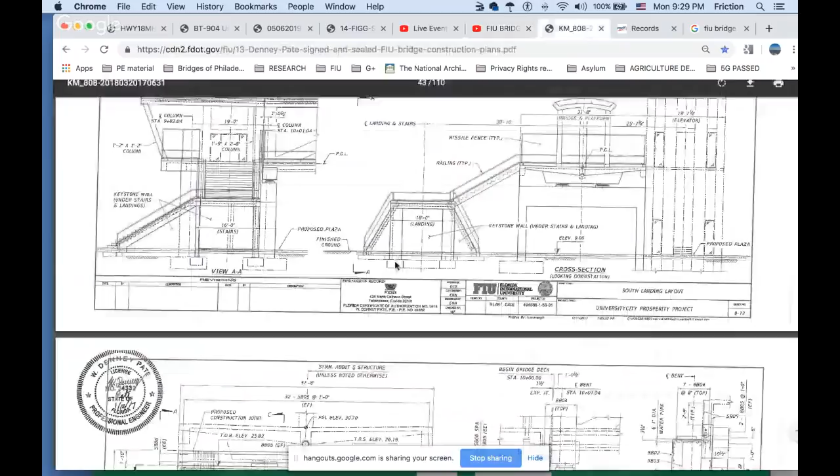Let's jump into this. So right now we have a release from, these are only tabs I'm going to work with right now. I released them from 44 pages. Well, it shows up as 44 pages on my format on this situation and on this structure. You know, grout was my number one thing. It's only got 2 points of grout in here. Let's see if I can get this to work properly. It should. Okay. So when I look up grout, it says by using find.

MCM showed concerns of the timeline between using grout versus gray concrete as per workability. And once again, FIGG prefers the grout material, but if it helps expedite the process. Otherwise, FIGG will be okay. Now, let's just vindicate myself first real quickly. Look at this. CEI to FIGG. Do we need temporary shoring? FIGG, this is the question.

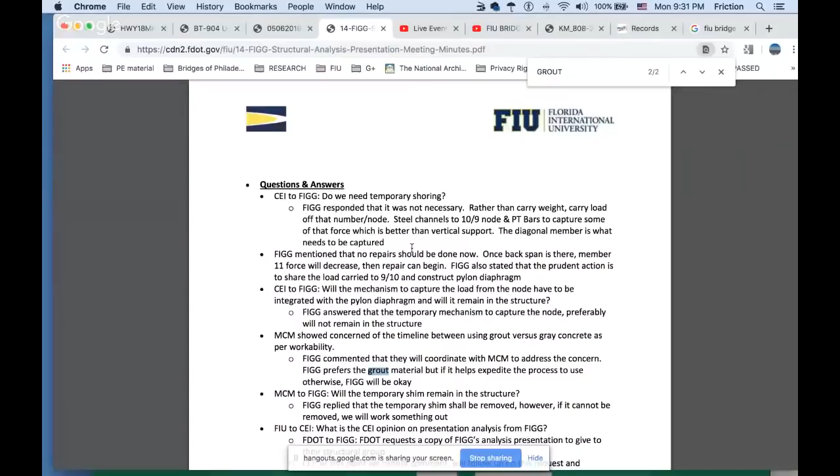Now, let me just see if that's in here real quickly. I have not read this document fully, only a few things, and wanted to get it going with you guys immediately. All right, so it's not said. So you know what I say to that? I say they're still patting each other on the back. Because if you want to throw somebody under the bus, that would also throw them under the bus, because if they said that and they didn't do anything about it, it would look bad on them. So I guess they're protecting themselves by not putting that exact statement forward. But it's still the same end result.

But I can't stand white lies. I just like the truth. All right. FIGG responded that it was not necessary. Rather than carry load off that node, steel channels to 10/9 node.

Guys, you know I can't wait to see some people come in here. I've been getting harassed by everybody telling me 11, 11, 11. Yeah, they talk about 11, but you know me, I kept preaching that these loads are going down 10. They're not going down 11 anymore. 11 is separating. It's not load bearing. It's a reversal, if it ever had intentions to carry weight. But here we are. The meeting was talking about 10/9. How awesome is that? I've been waiting for some vindication. So far, getting it from FDOT.

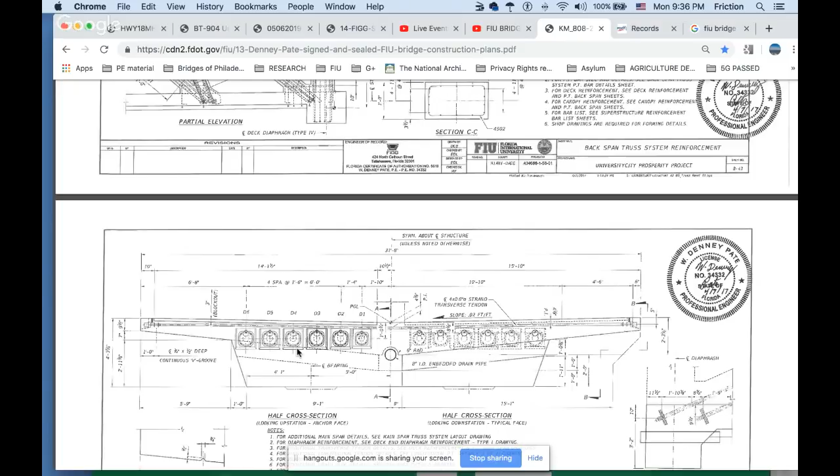So let me come here for you. The base, where they come across all of them. And so this will now end my thoughts of it's no longer ambiguous for me by reason or deduction, extrapolation. We have 6 post-tension bars here, cables here, and 6 over here. They appear to all be filled in working order. They appear to be all capped, that they're all installed.

So if he's still saying that the backspan needs to be connected, remember I wasn't sure. I've always had a theory that this entire structure over here could be supported by the post-tensioning of the cables here, longitudinal cables. But their video, if you remember, was saying, look, they don't have the canopy tied in fully yet. That would have taken some of the load off of the deck here, because the canopy would have been supporting it. And that's what I've said about the design, if you guys remember, in a couple of my videos.

That's what they're talking about here when they state, once the backspan is that 100-foot, what they call the other span, the backspan. All right, so the other connection. Once the backspan is there, member 11 force will decrease, then repair can begin. Okay, so they're thinking member 11 force will decrease, the tension in it. Not going to mention compression yet. But that would tie the roof canopies together.

So let's do this. Let me give you an explanation of that. Sorry, I'm going to scroll to the top on you guys, so you're going to have to bear with me. It's going to be a few pages. And where's the mouse? Okay. So you can see what they're referring to, because I don't want to lose anybody who's new to this whole thing.

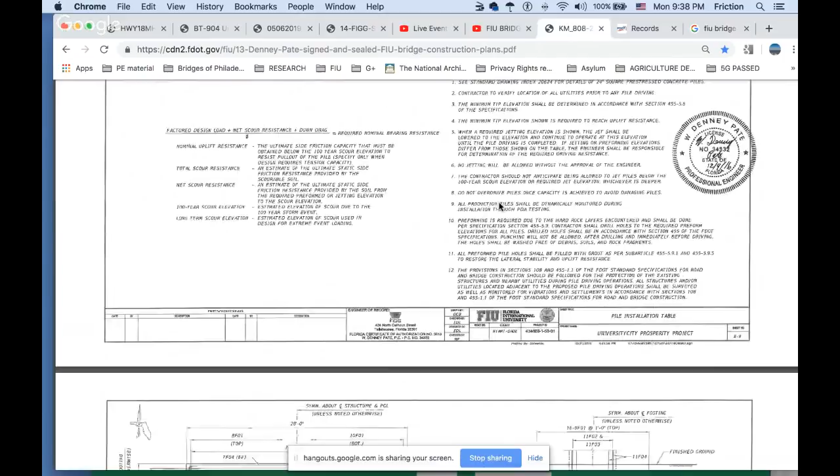That would make this a long, more rigid, complex situation, along with this pylon going in. It would tie it all in, lock it all in, and that would act as one. So a lot of people hate on this structure. Of course, it's been a year and a half. I did a slenderness factor, just hating. I'm biased. I don't like post-tensioning. I love what it can do. I just don't like it because it just seems destined to fail.

And I wanted to load a video up for you guys, it's from another guy, but now I lost the video somewhere on all my hard drives, external drives. I was trying to find it tonight before this video to talk about what would fail first.

If I were to think of your lug nuts on your car, and you can put this anywhere you like, but if I were to tighten up lug nuts, let's call them 5 lug nuts. Let's say I torqued them all at 69 pounds or 70 pounds, make it easy for you guys. They're all exactly torqued at 70 pounds. But the clamp force is different. You guys are like, wait a minute, what's this mean, clamp force?

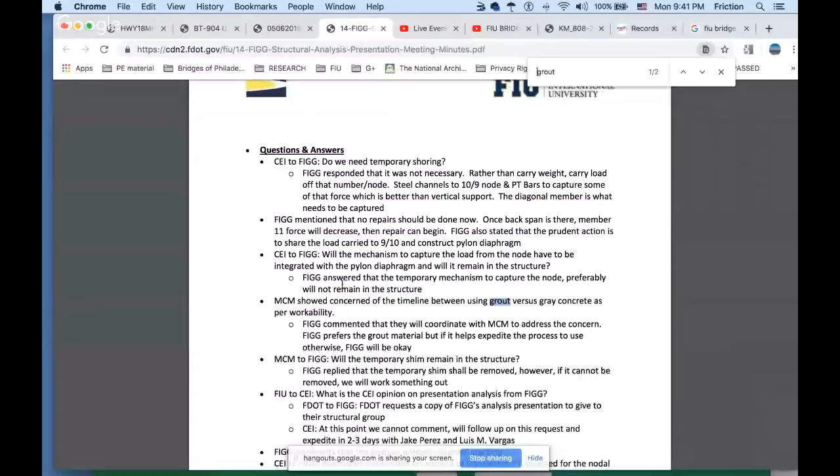You need more ways to determine strain on this stuff, elongation. And so they have a factor that's... let me move on from there. The factor can bite you in the ass. Obviously, it did in this structure. MCM show concern. Okay, where am I going here? Once the backspan, this is FIGG speaking, 11 force will decrease, then repair can begin. FIGG also stated that the prudent action is to share the load carried to 9 and 10 and construct a pylon diaphragm.

Guys, you know how much I've been crying about this 9 and 10. I am so vindicated now. This is FIGG saying this, so he realized it was going down 9 and 10, which I've always screamed to you guys. There is no force in 11. 11 is not the issue. It's 9 and 10. It's 10. You guys know how much I cried that. So now I wonder if anybody's going to eat their words now, all these other groups that attack me.

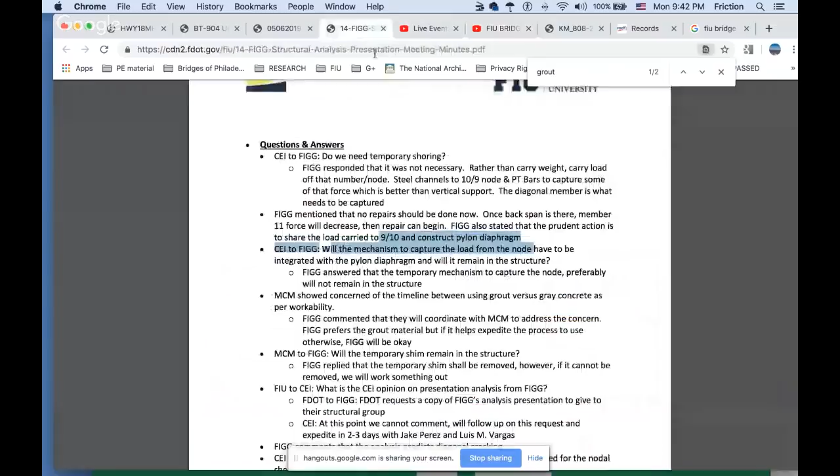Hey, Embry. You said there was an invisible bird. Thank you. Hey, I got to give myself a thumbs up so I can pat myself on the back. All right, look. So all the other groups attack me for not saying 11 is non-load bearing. Eat me. Embry must like that. Embry's my man. He's aggressive like that. So I'm laughing my arse off right now with this one. I'm smiling, actually.

All right, the CEI represents FIU. The CEI to FIGG question is here. Will the mechanism to capture the load from the node, and we're talking node 9 and 10, has to be integrated into the pylon diaphragm, and will it remain in the structure? So they were talking about a steel, some type of brace, and that brace would carry the load from here to, of all things, the pylon, right? This is where I said the weakness, the issues are happening.

So they 100%... Denney Pate obviously saw it, he had photographs. And it took me some time to see this. If I'd had the photographs, I'd like to say I would be fast too to come up with the answer. But it took me a while with the limited data I had to come to this. What, 4 months before I finally said it's going down 10, and nothing down here. Maybe 4 months. I finally committed to that with the data I was able to capture. Well, maybe I committed earlier. What do I know? Maybe it was 4 weeks.

CEI to FIGG. Right. FIGG answered that the temporary mechanism to capture the node preferably will not remain in the structure. So this 9 and 10 node, to capture it and redistribute it to the pier, the pylon. The pylon. So we come here, the pylon here. They're going to talk about shims. I did get that far before I jumped in here with you guys.

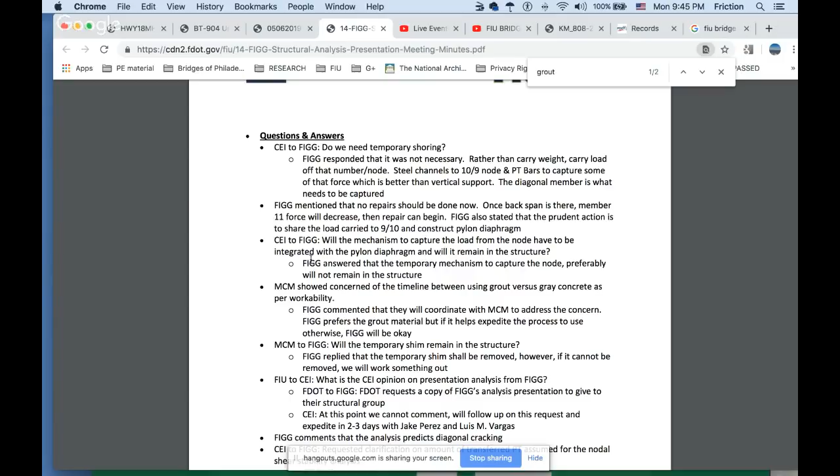CEI to FIGG. Well, the Met, right. FIGG answered the temp, right. MCM jumped in on this part, well, at least the way they put this forward. MCM showed concern of the timeline between using grout versus gray concrete as per workability. Now let's think about this. We talk about slander and stuff like that. This is FDOT putting this forward. FDOT putting this forward during a court case clearly is willing to stand by this statement.

So we're probably looking at a real document, and FDOT with this document is clearly saying to NTSB, hasta la vista, baby. We're now covering our tracks. We're gonna start covering our ass. So this document here, clearly without NTSB's permission, would be a violation of their agreement. So now we're gonna start seeing things come out, I believe, the fight backs, but we will not see it come back from MCM. We will not see it come back from FIG, because you got to remember, any public statement they make could be a court action against them. So we won't see them speak up. If we do, that would just be ludicrous on their part.

MCM showed a concern that the timeline between using grout versus gray concrete as per workability. Okay, do you see this? This is a jump, and I don't want to fall into post hoc stuff. I'm really about that post hoc stuff. Just because of one doesn't mean the other's tied together. So I feel like I'm being set up here. This is too much of a hand-me for me. I kept saying the things aren't grouted. There's no grout. I don't like this. The way they're handing this to me right now, I don't know where this grout is specifically going. Is it in the tubes? Is it part of the shimming of the structure?

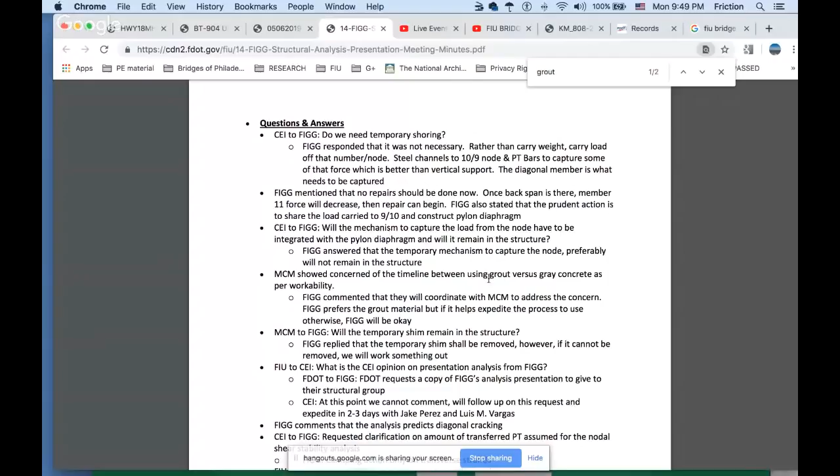MCM showed concern of the timeline between using grout versus gray concrete as per workability. Okay, so this grout is mentioned, but it's down here. I think they address it more. Let's go back up here. Attendees: FIGG, MCM, FDOT, FIU, 2 representatives, BPA, CEI, Joseph Morales.

Okay, FIGG's presentation summary. FIGG pointed out the cracks look more significant in person than on photographs. You guys remember I said this? But remember, I only had access to that for a very short window. And I said I lost my damn notes on it. I said somebody kept saying it looked worse. And isn't that amazing? It was Denney Pate that was saying it looks worse. It's more significant in person than on photographs. It was Denney Pate saying that all the time. Or FIGG, if you will.

Whereas I think I might have told you guys, so I need a correction, that it was somebody photographing in the field, giving it to the meeting live minutes. Well, remember, I was looking at notes from, yeah, I think I might have said that already. So I'll jump down that hole. From an OSHA report. So the OSHA report made this statement here. Temporary construction loading condition. Bridge was loaded onto the permanent support on 3-10. This is just documents, matter of statement, I don't want to say fact.

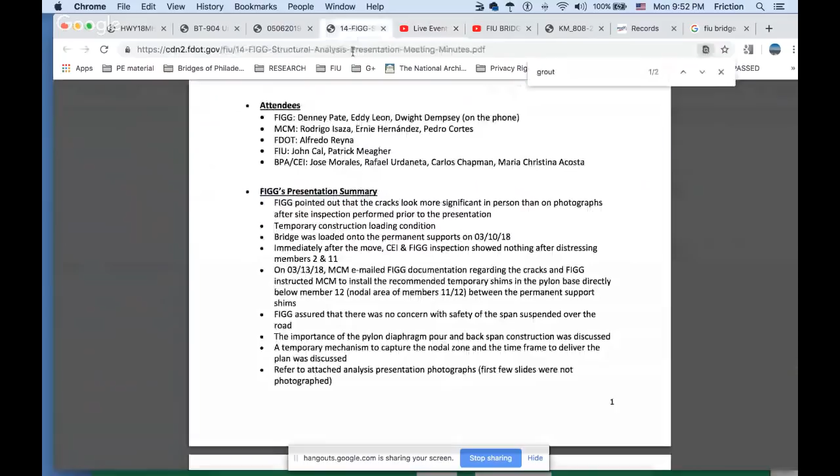FIG assured that there was no concern with safety of the span suspended over the road. Okay, we already heard that one. The importance of the pylon diaphragm, pour, and back span construction was discussed. Okay, a temporary mechanism to capture the nodal zone and the time frame to deliver the plan was discussed. So this was talking about the repair. Nodal zone would be that 9 and 10, 10 and 9. However, they wrote it twice, 2 different directions, I think. Refer to attached analysis presentation photographs. First few slides were not photographed. Whatever that means. Okay. And here it is.

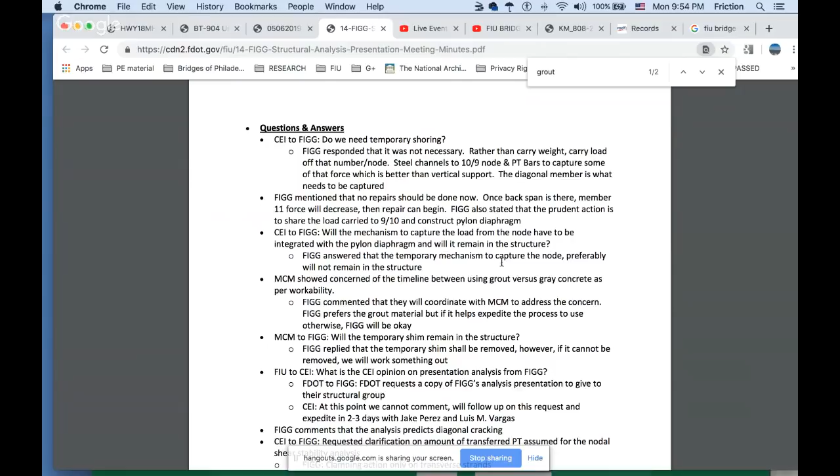the railing to the steel member for whatever reason, representing to the steel people of America, because you realize you're using concrete, you want to give an homage to steel. That's the way you play that off. All right. FIGG answered that the temporary mechanism to capture the whole node preferably will not remain in the structure. And I guess there goes my railing thing about the homage.

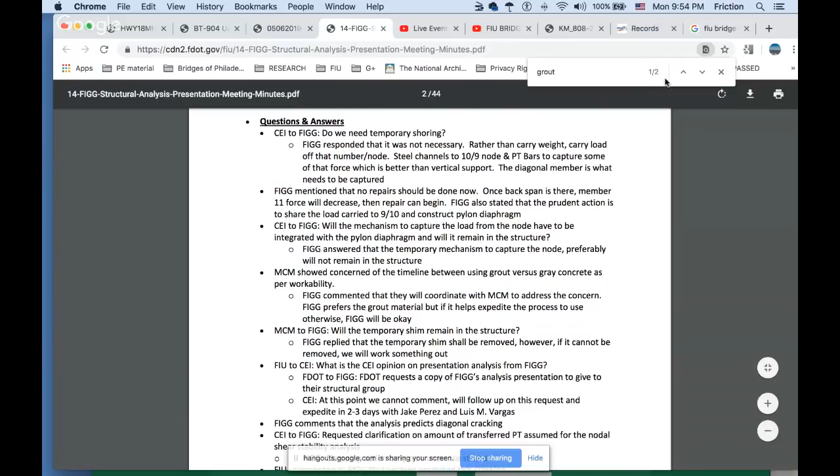MCM to FIGG: will the temporary shims remain in the structure? Now, the shimming they're talking about under 12, and oh, hold on. It's dealing with the cracks. Okay, I think I know what's going on. Let me back it up. I think I know what I'm looking at now. Where's that 12? On the 12 again.

You guys can probably see it. I'm bouncing around. That 12, 11, 12. The shims in the pylon base directly below member 12. Between the permanent support shims. I think that's some weird wording, but I think that the intent might really be that this is the pier.

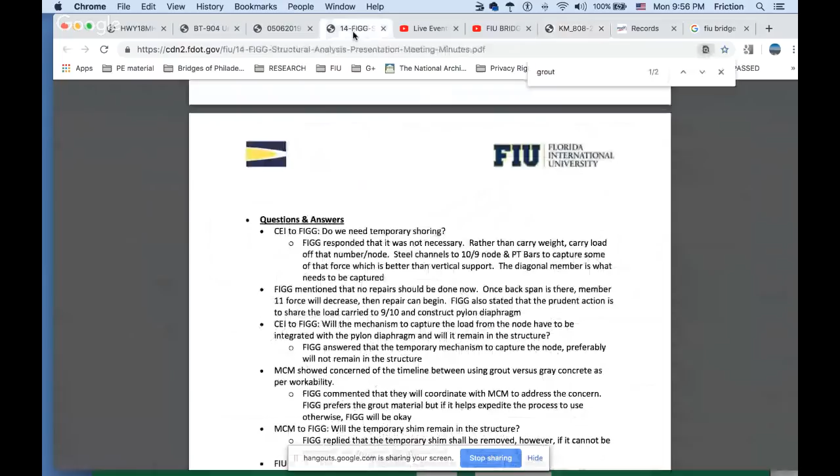Oh, okay. So I need another image. So the pier might actually be right on the edge of it. I was thinking right here, the bracing that they're trying to sneak in there. Let's keep rolling with this real quickly. All right. This is MCM to FIGG. Will the temporary shims remain in the structure? MCM's asking, structurally, will they remain in the structure? It's a good question. FIGG replied that the temporary shims shall be removed. However, if it cannot be removed, we will work something out, make it decorative.

All right. FIU to CEI. So FIU in the same meeting is addressing their own expert, if you will, and they asked, what is the CEI opinion on presentation analysis from FIGG? FDOT to FIGG. Oh, I'm sorry. They don't answer it. FDOT requests a copy of FIGG's analysis presentation to give their structural group. They want FIGG's analysis so they can present it to their structural group to look at it. CEI: at this point, we cannot comment. We'll follow up on the request and expedite in 2 to 3 days with Jake Perez and Luis M. Vargas.

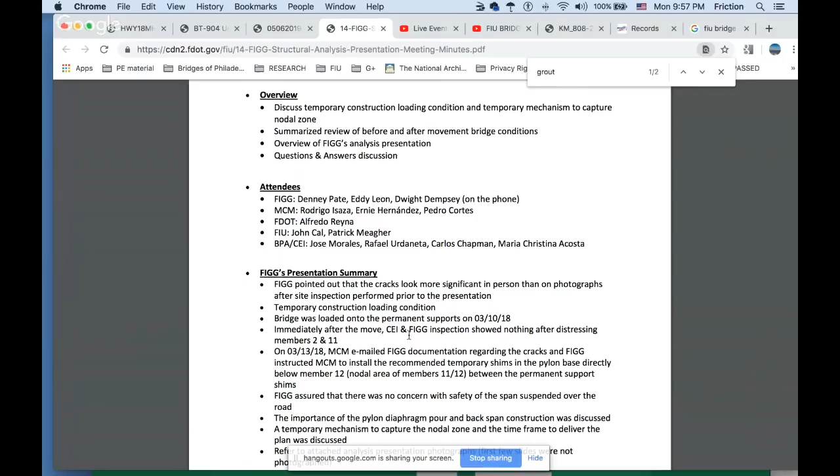So I forget who they are. They could be the CEI engineers, other engineers, or it could be anybody. It doesn't really matter. They punt it. They just punted. FIGG comments that analysis predicts diagonal cracking. So we know it's diagonal cracking. We see the diagonal cracking going up the member.

CEI to FIGG. Now, CEI, that's FIU's representative, remember? Request clarification on amount of transfer post-tension assumed for the nodal shear stability analysis. They want the data. FIGG: clamping action only on transverse strands.

So they're leaving out, they have a lot more details. Maybe it's in the photograph down here, but maybe the transverse comes across, right? Longitudinal, these guys; transverse are the ones that come across this deck. So maybe when they go to put this brace on, he's saying that the stress is going to be on those. I'm extrapolating at this point.

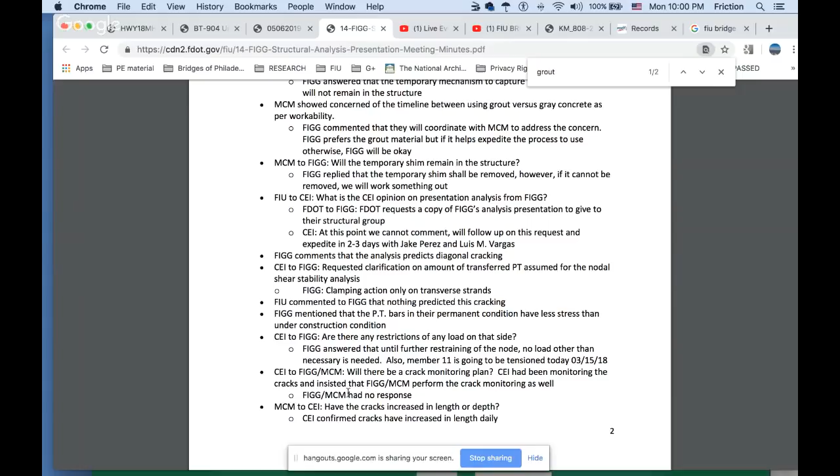CEI to FIGG and MCM: Will there be a crack monitoring plan? CEI had been monitoring the cracks and insisted that FIGG/MCM perform the crack monitoring as well. FIGG/MCM had no response. MCM to CEI: Have the cracks increased in length or depth? CEI confirmed cracks have increased in length daily.

FDOT to FIG: Are you going to continue to figure out why it happened? FIG responded that all we, quote, know is that it just happened, end quote. All right. Awesome. So leaving out a lot of the rest of the statement, it's "it just happened." That's a weird piece of quote they snatched out of there, isn't it? That's unfair to FIG for sure.

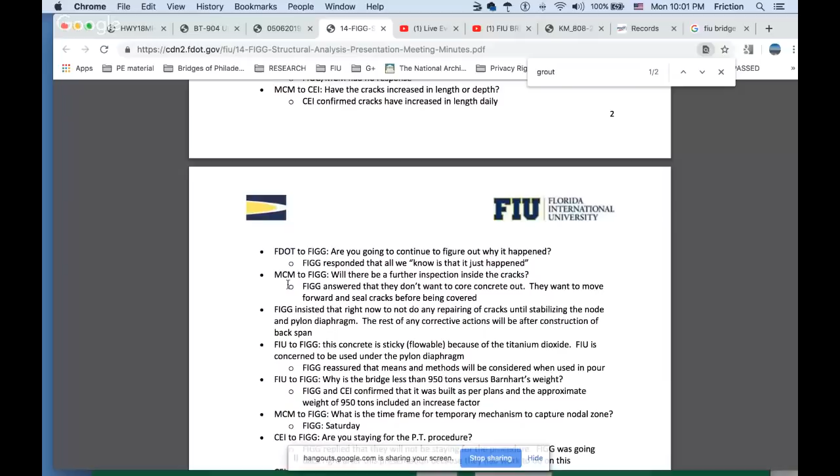MCM to FIG: Will there be further inspection inside the cracks? I like this. So MCM, the builders, asking FIG, the engineer, will there be further inspection inside the cracks? FIG answers that they don't want to core concrete out. They want to move forward and seal cracks before being covered. Whoa, he says you have a plan. And they want to seal cracks before being covered.

What the hell? FIG insisted that right now to not do any repairing of cracks until stabilizing the node and pylon diaphragm. The rest of the corrective actions will be after construction of backspan. So yeah, he punted. He thinks the backspan is gonna give it reinforcement at this point with the longitudinal cables across the canopy, along with everything being tied in there, number 12 being tied in. That's what I extrapolate.

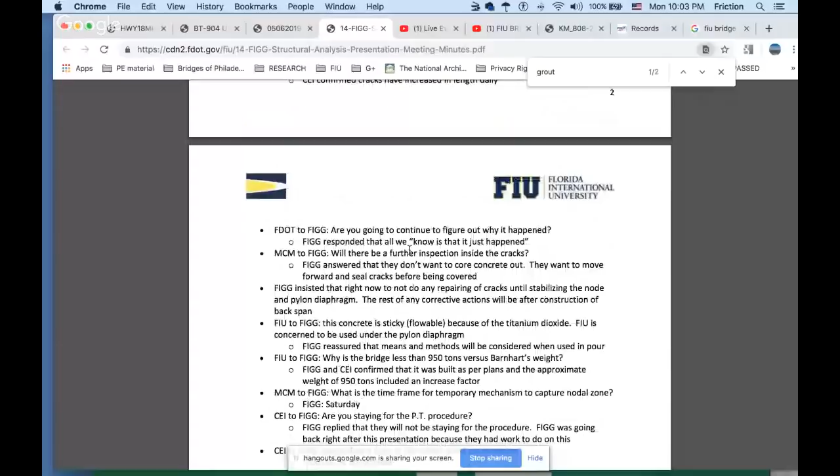FIU to FIG: This concrete is sticky, flowable because of the titanium dioxide. FIU stepped in now, not the CEI, but FIU. FIU is concerned to be used under the pylon diaphragm. Okay. It's sticky, flowable. That's kind of opposite, isn't it? How is it sticky, same as flowable? That one's got me weird. Let's look at FIU now because I can research these people. FIU's people is John Cal and Patrick Meagher. Sticky. Where are we going?

All right. Under the pylon. So that doesn't have anything to do with anything. I would want to know, is it this PSI? The bridge is 4,500 PSI. What's the PSI of your grout? This has to be 4,500 also. You don't change your grout. You don't make your grout tougher, and you sure enough don't make it lighter. So it's 4,500. That's where that stays.

So I don't know about all this weird talk going on from engineers instead of going, hey, we're just keeping it at 4,500, is what they should be saying. The bridge is 4,500. Our grout's got to be 4,500. So I don't get it, per FDOT's requirements. I'm giving that to you guys from FDOT's requirements. Scary. Yep. All right.

So we go back to FIG. This is FIG talk. Reassured that means that methods will be considered when used in pour. Okay, so this is not a placement. This is a serious piece of concrete they're talking about adding. If it's grouting, it's just a little bit of tooling going on, but we're in some serious grouting. If it's shimming rather, we're way beyond shimming, whatever they're referring to right here. So this still needs some explanation to me when I see this word here.

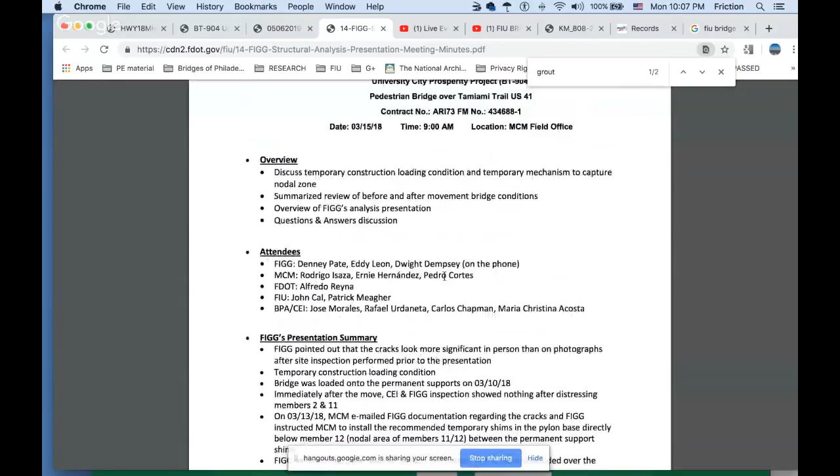So let's go back up here again. I'm looking for the... FIG: Denney Pate, Eddie Leon, Dwight Dempsey on the phone. That's that phone call I told you about, guys. Someone was on the phone with Dwight Dempsey. He was getting the data too. Okay. There we go. FIG was going back right after this presentation because they had to work on this.

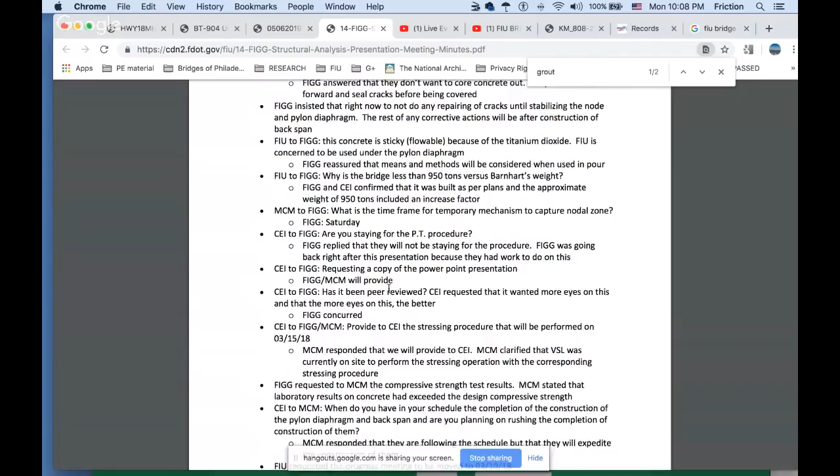CEI to FIGG. Requesting a copy of the PowerPoint presentation. FIGG/MCM will provide. So FIG is referring to himself as FIG/MCM. And remember, the insurance companies were saying that FIG is acting as a builder, and that's not what they insure them for. They insure them as an engineer. So this would kind of get you in trouble.

CEI to FIG. Has it been peer reviewed? CEI wanted more eyes on this, the more the better. FIG concurred. CEI to FIG/MCM: provide to CEI the stressing procedures that will be performed on 3/15/18. MCM responded that they will provide.

All right, guys, let me jump forward because I haven't read this. Remember, that report said Denney Pate said put it back to where it was when it was sitting in the impound, as I call it, when it was on the side of the road. Let's see if they get that. MCM responded that they will provide to CEI. MCM clarified that VSL was currently on site to perform the stressing operation with the corresponding stressing procedure.

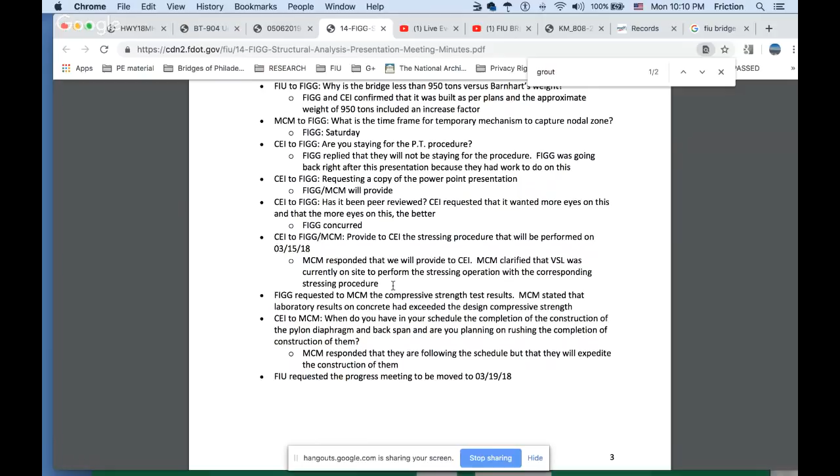Which we now know was number 2 and then down to number 11. They were obviously working on number 11 during this meeting. The collapse was 2 hours later, and I extrapolate that because when we watched them post-tension the rods before, they took 2 days to do it. And now only 2 hours into the day of this meeting, they're already down to number 11, and they reportedly had already tensioned number 2.

So days before, when they first started doing this, and I did a video on that, they took 2 days to do number 2 and number 11. And now, the day of this, they dust off number 2 in a heartbeat. They're already on number 11. So that's my extrapolation.

FIGG requested from MCM the compressive strength test results. MCM stated that the laboratory results on concrete had exceeded the design compressive strength of 6,000 PSI. That's telling too. It's this late in the game, and FIG is now asking for compression results of concrete. So we can extrapolate that the head engineer isn't even keeping track of whether the concrete passed or not. He's basically off in la la land, because that's just craziness.

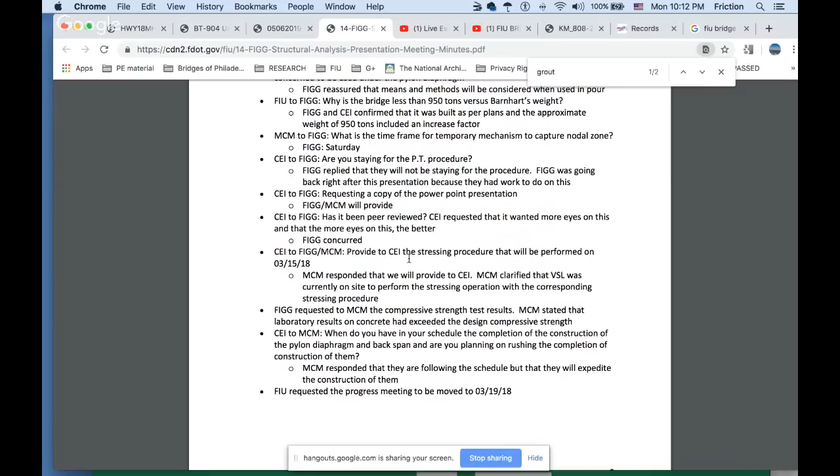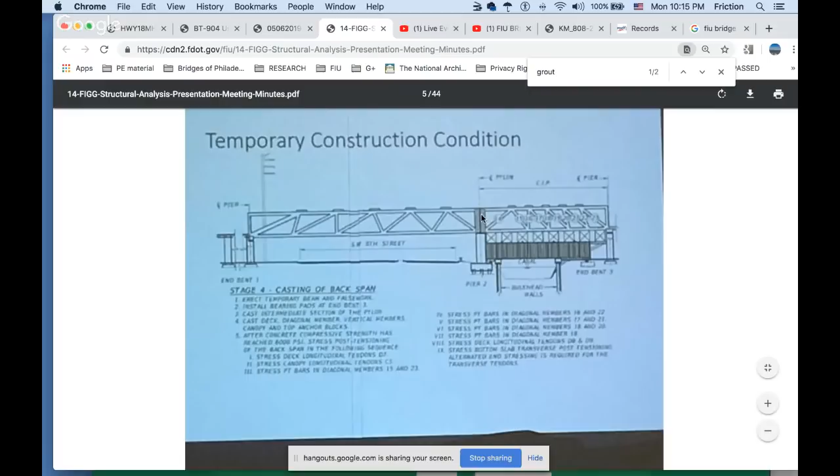Now, I don't see a deviation from the plans. Concrete takes 28 days to cure, so we're talking a month here. So they would put a temporary brace up here, and it's going to stay there at least a month. This takes another 2 months to build. So this would have been 3 months before they'd have been working on a pylon probably, or maybe they could start loading this area already based on the pylon's structure, the loads and whatever they decide.

Oh, there's our shimming. Immediate action, Tuesday morning. Upon seeing MCM's information, FIGG requests that, as prudent action, MCM immediately install temporary shims directly below the nodal area of members 11 and 12 and the top of the pylon pier while further evaluation was going on. I told you guys this had to be shimmed anyway. The plans say this was supposed to be grouted, secured. And remember, it's on that nylon right now.

And this is a good image because the cracking is in here somewhere. And I didn't find any cracking in this part of the bridge base, if you will, the pier cap. I can't even call it a pier cap. It's all one. But you get it.

Okay, the shims placed during the span move. Here's the nylon. Shim plates, typical 3 foot. We're talking 6 inches here. And they're saying that span here is, what's that, 3 feet, 2 inches. That's a big span. I can't see it, but I thought that had nylon there already. I could have sworn I saw nylon. This is wrapped in nylon.

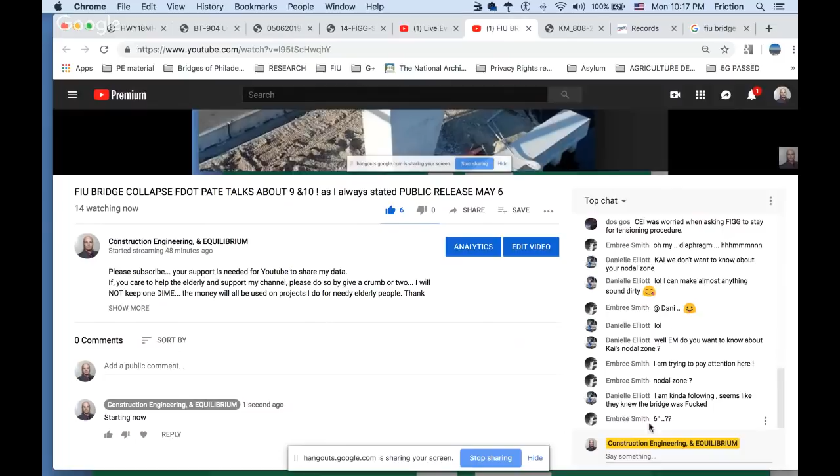So the grouting would be more on the backside of it because this gapping, well, it identifies as 6 inches. What have we got here? Nodal zone. Yeah, nodal zone. 6 inches. Yeah, thank you. I am kind of following. Seems like they knew the bridge was this way there. So 6 inches, right? Yeah. Nodal zone. Embree, I hope you caught that 10 and 9 stuff that I was talking about.

So let's go back to, where is it? Oh, we got 2 more of these exhibits, but I didn't open them up. I had to get you guys involved. So 6 inch. So this is where they said this needs to be grouted, but what's up with that? I don't see the bars in his detail coming up here. And the videos I've watched, it had nylon going all across here. So Denney Pate doesn't even know what PSI concrete it is. So he probably thinks this is real, that it's a gap there, when there is no full gap like that. Well, I could be wrong, but I don't think I'm wrong.

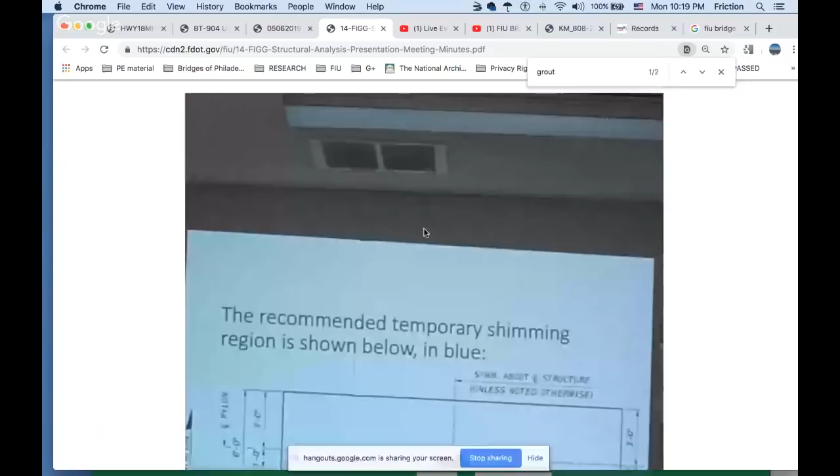What's this temporary stuff? It was supposed to be grouted. The plans call for grouting immediately. So Denney Pate doesn't follow his own plans. What's going on here? I'm feeling real weirded out by this guy. You're sending me some crazy signals. I read all your stuff and you can't even remember that this is just supposed to be grouted, period. There's no temporary and all that other junk you're talking about here. It's supposed to be grouted. But no crack showed up on the outside there.

So kind of academic. The unsupported spans are like 6 inches, right? The other one's 1'3", and the post tensioning is on the outside of this thing anyway. And we know that they don't have it going down the middle with longitudinal post tension cable. So what, you put a little grout there? It's all 6 of one and half a dozen of another with this bridge, because besides the transverse cables transferring the load to the longitudinal cables, there's nothing down the middle besides a pipe.

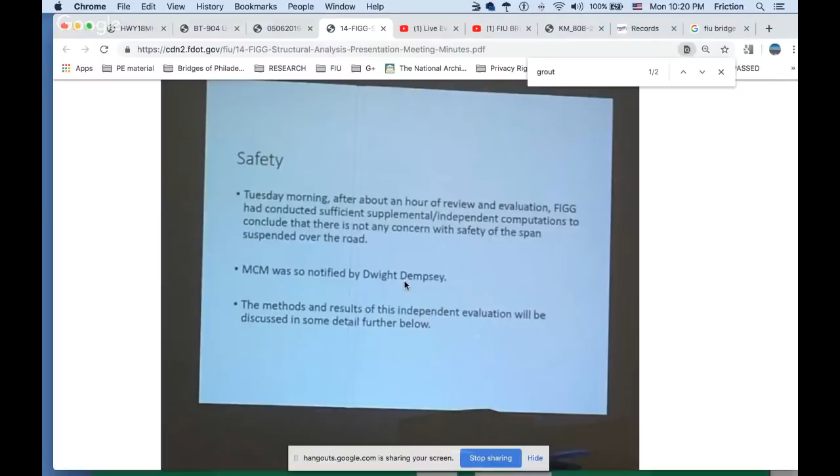Tuesday morning, after about an hour review and evaluation, FIGG conducted sufficient supplemental independent computations to conclude that there is not any concern with safety of the span suspended over the road. MCM was so notified by Dwight Dempsey. Dwight Dempsey is in Pittsburgh, Pennsylvania? Really? Or something like that? The method and results of the independent evaluation will be discussed in some detail further below. Yeah, I can't wait to hear this independent stuff. How can he be independent? Yeah, it's kind of weird.

Yeah, that's in the impound. History of the specific operation. The span was fully self-supporting on the end diaphragms in the casting area, full post tension, etc., for several weeks prior to the move. Remember, I did a video on that, guys. I said, look, this thing's been load tested by its own dead weight. You guys remember that video? And here's Denney Pate saying that. So I feel real great about that video now too, that I said this thing's been dead weight load tested.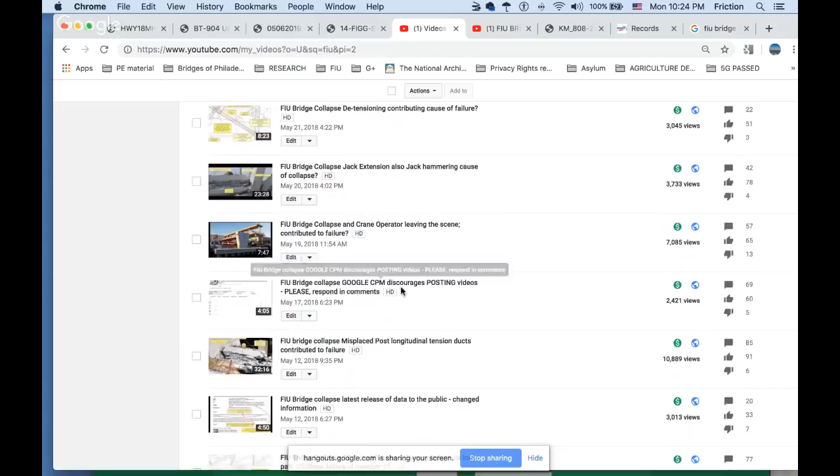And there's the grouting issue. It looks like this, I think, the thumbnail. Looking for the dead load one, if you guys remember it. Right here: FIU bridge collapse and load testing using equal unsupported span as final installation. I did a video on that back on May 1st, and that's the video I did on that.

And 9 people hate me.

Anyway, where I talk about load testing using equal unsupported span. And this is what Denny Pate states in his presentation. Looking at it, grout is typical; you grout something so it transfers the load equally. It's got to make sure it doesn't crack out, right?

During the time the pylon and diaphragm was uniformly supported over its entire surface area on the original soffit during casting, no significant cracks or distress of this region were noted. Well, we saw a lot of cracks, but they call it no significant. Denny Pate does in his presentation. And right here, the span was fully self-supporting on the end diaphragm in the casting area for several weeks prior to the removal.

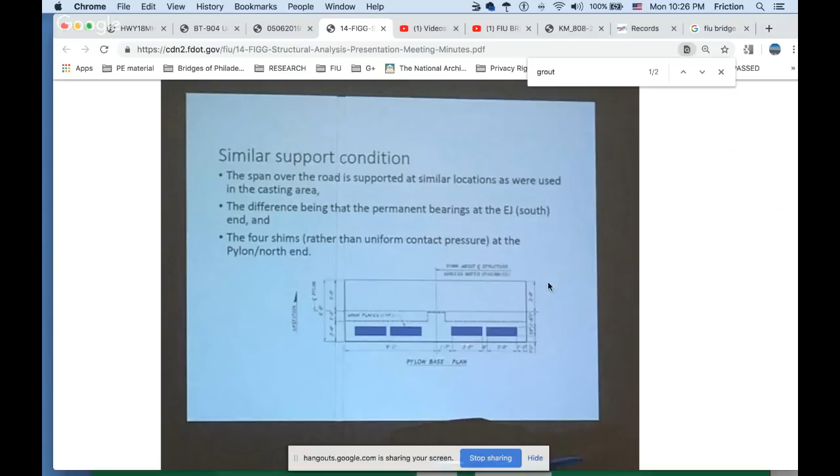That's the load testing. They could have put a water bladder up there and really load tested this, but they didn't. Water bladder, to do the loads. Similar support condition: the span is supported at similar locations as were used in the casting area, the difference being the permanent bearings at the EJ south end, and the 4 shims rather than a uniform contact pressure at the pylon north end.

Well, that's interesting. They're saying that they have the 4 shims rather than uniform contact pressure at the pylon's north end. Well, that's not true either. Guys, I'm nuts over this damn thing. Both ends of these have nylon on it. On the other end, the crew was standing there, the 2 guys, for some time. I saw the nylon. That had nylon on it too. Well, nylon-type materials.

De-stressing of temporary post-tension bars. Now this is interesting because this is his presentation. The only other notable difference from the condition in the casting yard location is that the temporary post-tension bars in diagonal members 2 and 11 needed for the move were de-stressed. That ends that. The number 2 and 11 was only for the move. I get credit for that too, because I said it was just to take the loads off. It was over here just acting as shear walls, just to keep it from falling off. So, yep, got that one covered too.

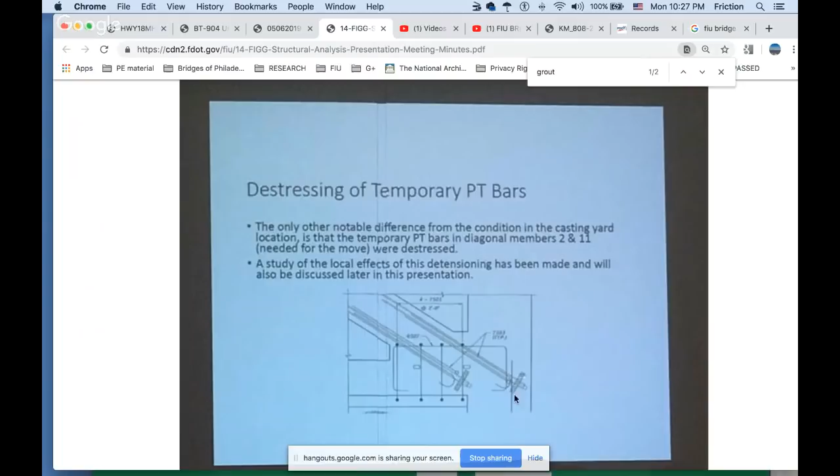A study of the local effects of this detensioning has been made and will also be discussed later in the presentation. So what effect would it have, if any? Okay, design recheck. Let's go back to that one more time. The temporary post-tension bars in diagonals 2 and 11 needed for the move were de-stressed. They said for the move. Denny Pate's own plans say it will not be de-stressed until the total completion of his span.

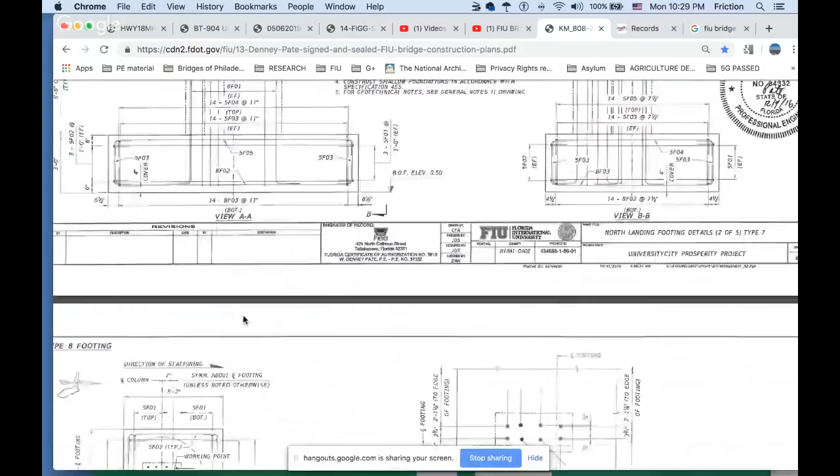So I have a real issue with who did not follow his directions. His directions were pretty clear to me that post-tensioning in 2 and 11 would not be detensioned until the main span was complete. The main span cannot be complete until the back span is complete; the back span is tied into the whole structure. That's why I made a video asking how you were going to detension this if you follow his statement. And I'm going to show you that in his 2017 stamped plan.

Oh, you son of a... I'm still in 2016. 2016 still? I'm going to give it a fast refresh. Well, I guess not. It's a little delay here, because I'm live online.

So let's get down to that 2 and 11. It's going to be on the left-hand side, so I have a rough idea where it is. Over here, you see this 2017 stamped plan, so we're solid on that.

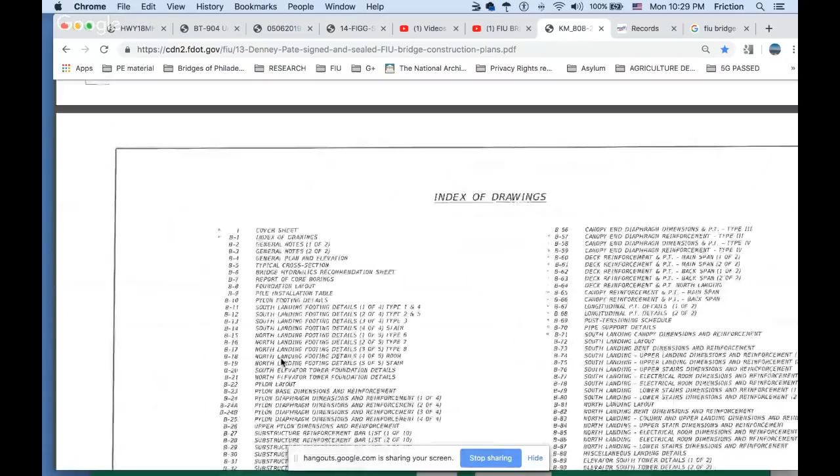There's your 6,000 PSI. Post-tension bars and members right here, number 8, please. Post-tension bars in members 2 and 11 will not be grouted and will be de-stressed after main span construction is complete. Do not remove after main. So this was a wrong step.

The question is, was it approved? I never found anything in all my disclosure stuff, guys. So this was not to be detensioned. So, therein lies, Denny Pate, this thing might have worked. It might have worked, but they deviated from his own plans. The cracks, though, I don't like the idea of cracks in it, but this might have worked, and also probably has some post-tension failure in the longitudinal cables. So that probably needed better monitoring and better workout.

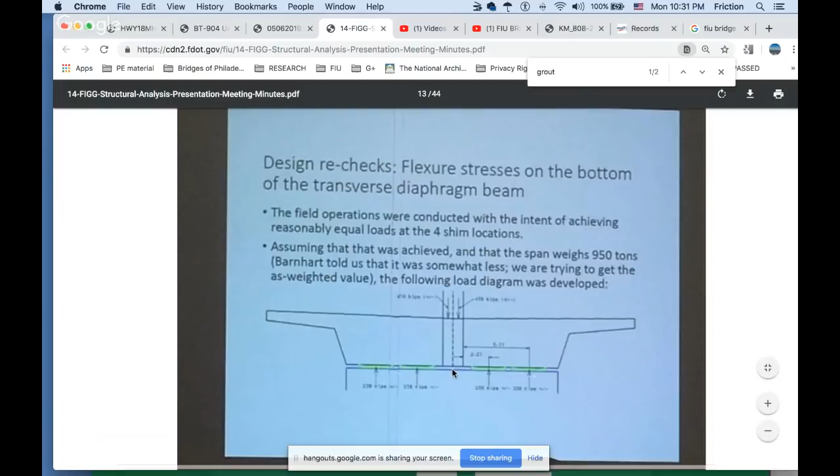Design rechecks. Flexure stresses on the bottom of the transverse diaphragm beam. So this is what they're calling the diaphragm. Well, he's not quite identifying it as such, but this is what I'm extrapolating. This is the diaphragm transverse beam going across this way. This is the part that sits on the pier. Here are the shims. Again, no shim appears present in this drawing. The field operations were conducted with the intent of achieving reasonable equal loads at the 4 shim locations.

Reasonable equal loads. Well, that's not... Let's read that again. The field operation was conducted with the intent of achieving reasonable equal loads at the 4 shims. I think it's very reasonable to say it's got to be within 1/16 or 1/8 of an inch. They've got engineers there. They've got surveyors there. They can make this in this little bit of distance. You can clearly nail 1/16 of an inch. Assuming that, and the bottom of this too, you can plane that to get it within 1/16.

That would be pretty difficult, actually. If you don't make this bottom perfectly flat in your formwork. Because while it was temporarily up in the air on those jacks, the transporter, you could have then planed it flat then, but that would look like a mess, right? People would get freaked out on that.

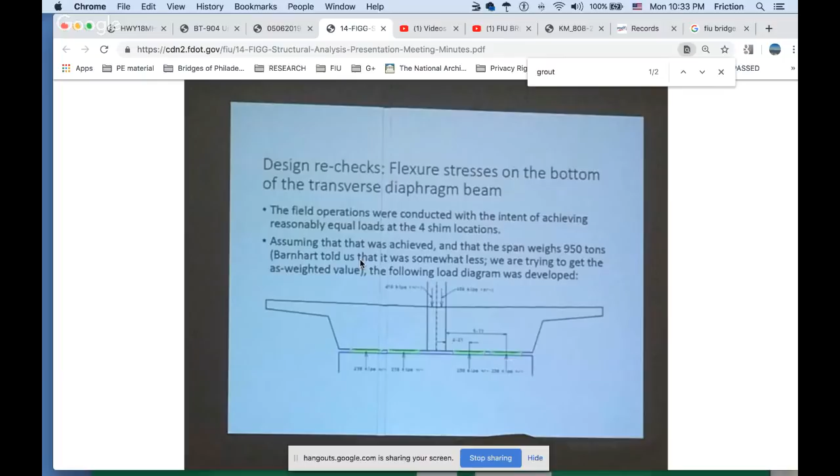Assuming that was achieved, and that the span weighs 950 tons. Barnhart told us that it was somewhat less. We are trying to get the as-weighed value. And the following load diagram was developed. So Barnhart told him it was something less. But I thought they said a moment ago in the conversation that they did an overcalculation of weight just as a margin of fluff. But now his presentation says otherwise, that Barnhart gave him a different reading. I don't like where he's going with that, but let's move on.

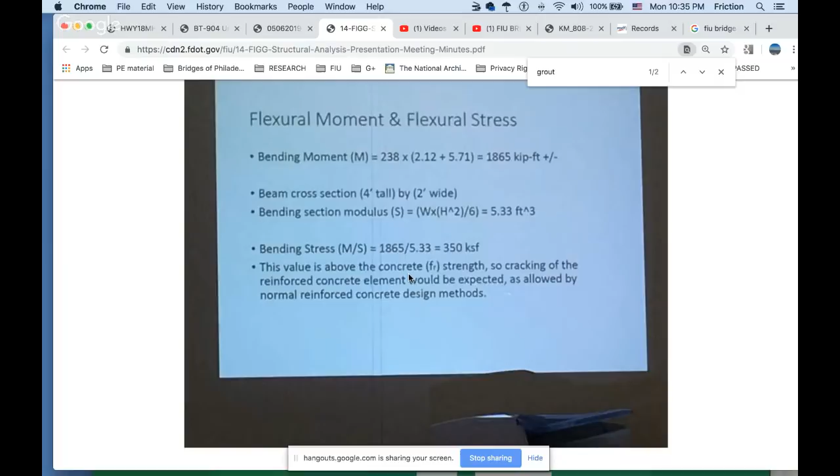Took a screenshot of that. Oh, I'll have a little fun with that another time. All right, moving on.

Oh, strut and tie. Design strength check. Given the dimension of this region, the most appropriate design approach is the strut and tie method.

So I had a couple of people tell me that, and I said you guys are all full of it. A couple of guys tell me they're engineers, and that you guys saw that one video I did, and that you don't know what you're talking about. This is load bearing, this is a non-force member, this is non-load bearing. Well, we're looking at this member right here, guys. And I told them all that they're full of shit, and you saw my video on it. No matter what they say, this is load bearing. And here we go, one more time, I get supported in my statement right here.

It's got 950 kips on the boy right here. Somehow it translates to 475 kips once you do what? 475 and 475. It has to be equilibrium, right? Why don't they put it over here too? I can't read this. But you see that? That's thousands of pounds. So it's no lightweight. That's a lot of weight. That's tens of thousands of pounds. So there you go for anybody watching who kept trying to tell me that I don't know what I'm talking about. Now you crackheads can bite me.

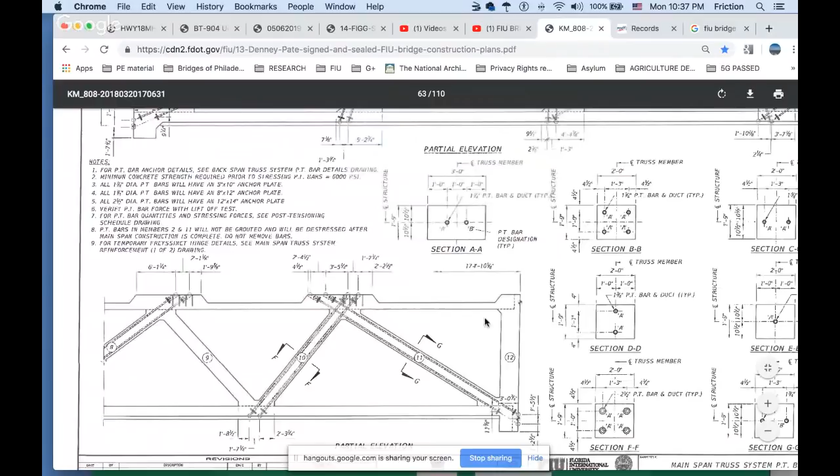Bite me. Ember's going to sleep. Oh, Danny's going to sleep. Good night. Thank you. Good night, Danielle. So more bite me medicine for you guys that come in here and try and troll me, if you look at this video later. Aha, I'm laughing at you. I hope my man would appreciate that, my man Embry here. Aha. Idiots. All right.

So moving on. I can't help it. I'm usually the smartest guy in the room. I said that to somebody who asked what makes me think I'm so right and everybody else going another direction. I said, I'm usually the smartest guy in the room. So if they all go in the other direction, I'm going that way. They need to think about which direction I'm going, because I'm probably the right guy. When I open my mouth, I'm usually not the wrong guy. I'm usually the one that sees it right. And so far, I get to pat my own back. Hold on. Let me do that.

All right. Strut and tie, tension force. T1, T2. So that's balanced. Whoa. They changed the degrees. And wait a minute. So I'm just trying to see the intent of this real quick. And I don't remember seeing this anywhere. Okay, I'm starting to get it. So it pulls off to the right. And this is where the deck failure was, right? So it pulls off to the right, here and here. So all things being in equilibrium, I got to think about this. Don't hold me to this, but that means it's also pulling up with the same amount of force that it's pushing down, which is putting a compression upwards here, and where would they meet? At the directional change?

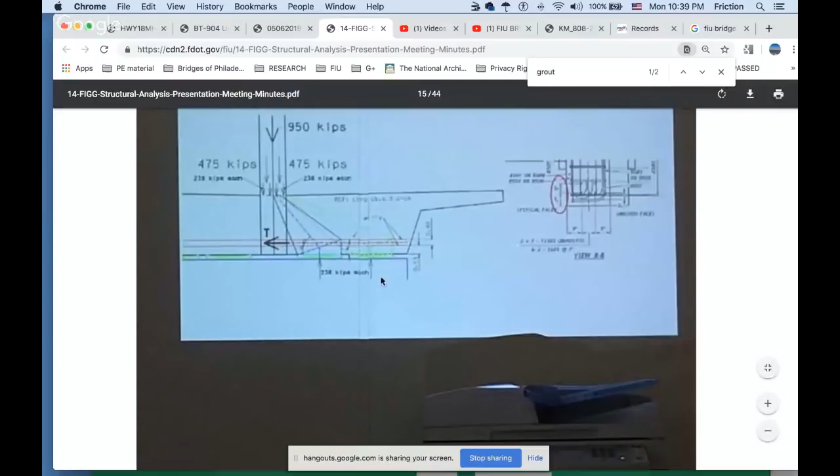This is very interesting, guys. This is going to get another video from me, because then I got to think about how it relates to what we actually see in the damage, where we see that things are not broken, but we do know we have breaks around here. This is interesting, and they didn't do it balanced in this drawing, but is this a plan? Strut and tie design strength check. This might be a repair. I don't know. I hope it's a repair. I hope it wasn't in there, because then that would be weird. It is not balanced. All right. And I didn't find any of the plans. Construction strength checks. The purpose.

So there's your equilibrium. Since the span was actually weighed conservatively, so he's saying you could take half the weight, but the structure is not uniform. So I don't know how he can even think of that. It's his own structure, and it's not uniform with the truss members design. The canopy and the decking appear to be uniform, but the truss members are not uniform. So I don't know how he can say that he can just use half.

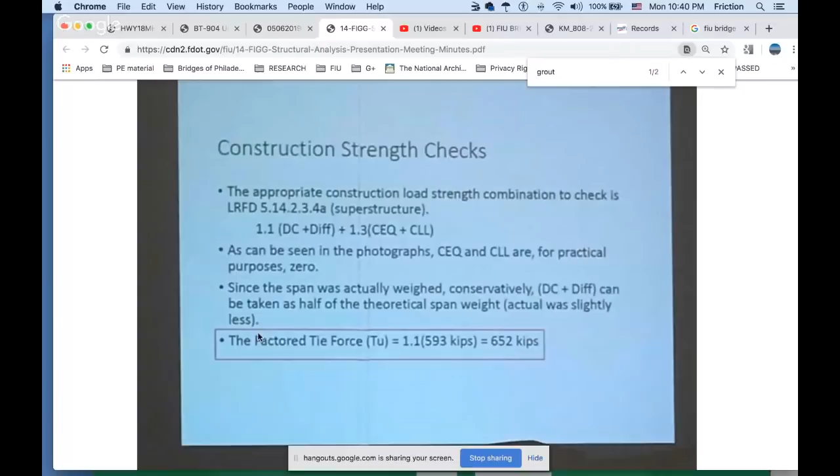Strut and ties. Well, here's my answer. Area of a steel tie equals 8 times 1.5. Construction strength checks. Strut and tie. Oh, this is the repair I think we're looking at here.

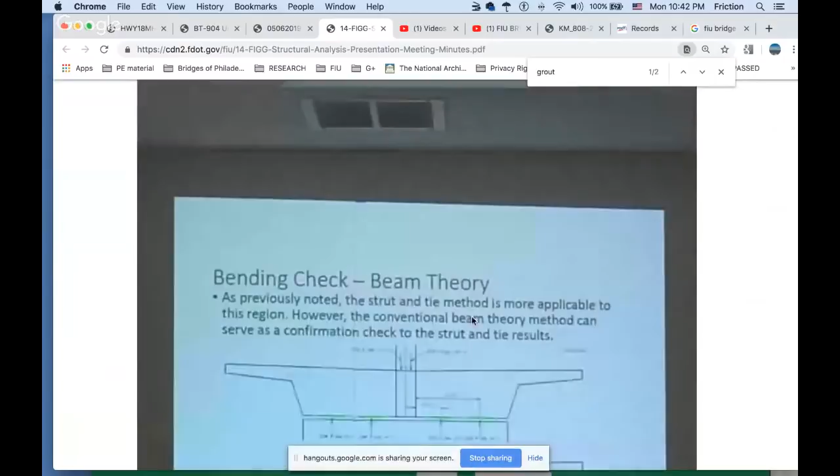It's a weird repair. He's got it anchored. If it's a repair, he's got the loads to try to say the reinforcement coming on the bottom of your feet, if you will, instead of down here, jumping all the way down to the pier. Somehow he's using it here, or was it on the pier? I can't tell. I can't read it. I can't blow it up. Don't see a thing.

Here's your equilibrium again. The compression in the concrete has to be equal to the tension in the rebar, and the moment created by the distance between T and C. Nothing for us to get out of that. This looks like it's part of his repair plan, but this never was implemented.

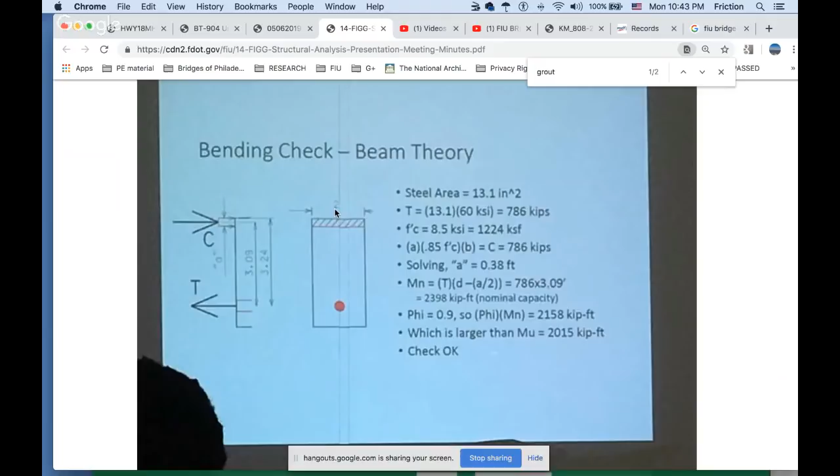Okay, nodal shear transfer of vertical loads. All right, the diaphragm cross-section area is approximately 2 foot by 4 foot, equals 8 square feet. The shear from the two shims, whatever that means, on one side is approximately 475 kips. So the shear on the other with two shims would be the same, 475 kips again, right?

So thus the average shear strength from the vertical load is approximately 60 kips per square foot, which is within normal range, 8.5 KSI concrete. But we're at 6,000 concrete. This is confusing. We're at 6,000 concrete. They're talking about 8,500 concrete.

Well, that's confusing. Why didn't anyone call them out on that, saying, where are you getting the 8,500 from? I'm trying to think if the pier is 8,500. I think the pier is also 6,000. I know the bridge is all 6,000, right? It's all one. Nodal shear transfer of vertical loads.

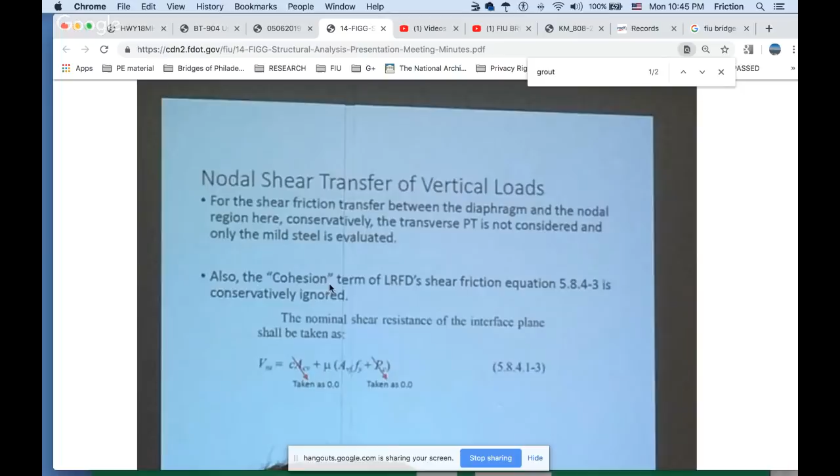For the shear friction transfer between the diaphragm and the nodal region here, conservatively, the transverse post-tension is not considered, and only the mild steel is evaluated. Also, the cohesion term of LRFD's shear friction. This is just not evaluated, just removed. Let's see. Nodal shear transfer of vertical loads. Number 83333.

I have to go over all this to figure out where these transcribe to, if you will, where they match up, right? Sliding on. Nodal shear transfer of vertical loads again. Factored shear demand, reduced capacity, easily okay.

I love that. You know, I give myself a thumbs up. Well, that's the same thing as giving yourself a thumbs up.

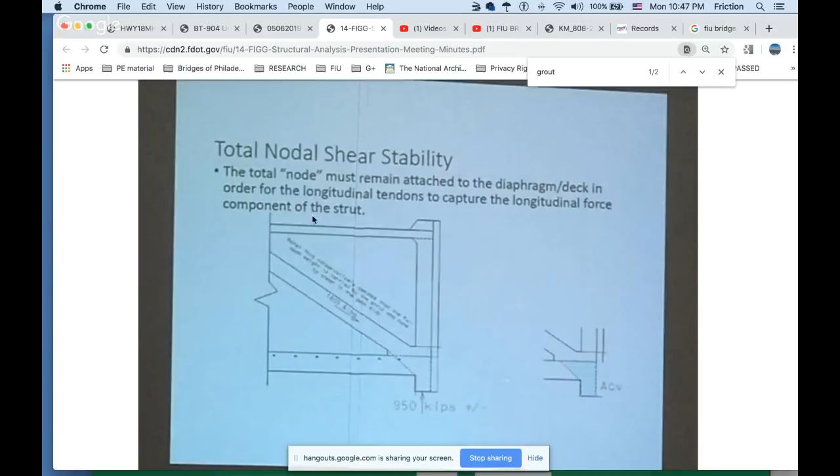That's awesome. All right. Total nodal shear stability. All right, here we go. 950 kips, pushing up, pushing down. Same thing, plus or minus whatever they messed up, whatever the real weight is. The total node must remain attached to the diaphragm deck in order for the longitudinal tendons to capture the longitudinal force component of the strut.

And this would be his strut system, the entire thing. Can't read a damn word that says there. So I disagree. If there's no cracks in that diaphragm, it's transferring the load, maybe concentrated onto each contact point, but if it's not showing those cracks at those points or between those points in this diaphragm,

then you're transferring the load without any harm, no foul. Yes, you must grout it as per his plans, but on this one he might be trying to throw the grouting under the bus. It's not me. The grouting's not done. That just seems like the true intent of this statement, trying to punt again. Total nodal shear stability.

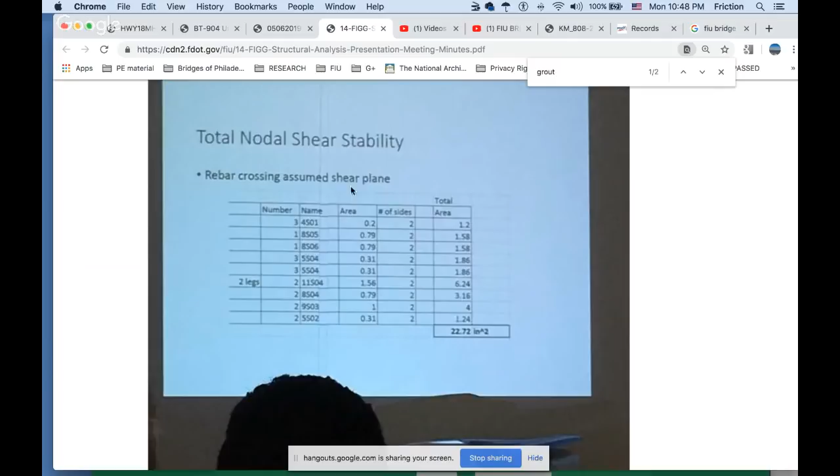Now we're talking about the rebar placement. Rebar crossing assumed shear plane. I don't know where these are, so I'm going to keep on rolling. 2 legs. No friggin' idea where that is. I couldn't extrapolate that properly. Total nodal shear stability, transverse post-tension confinement.

There are 65 4 by 0.6 diameter tendons in the 175-foot span. The total transverse tendon force is approximately, oh, this is so awesome. He added this up. I was going to play with this, and now this is disclosed. So then you figure out the weight, and whether the weight of the structure is defeated by these kips of the

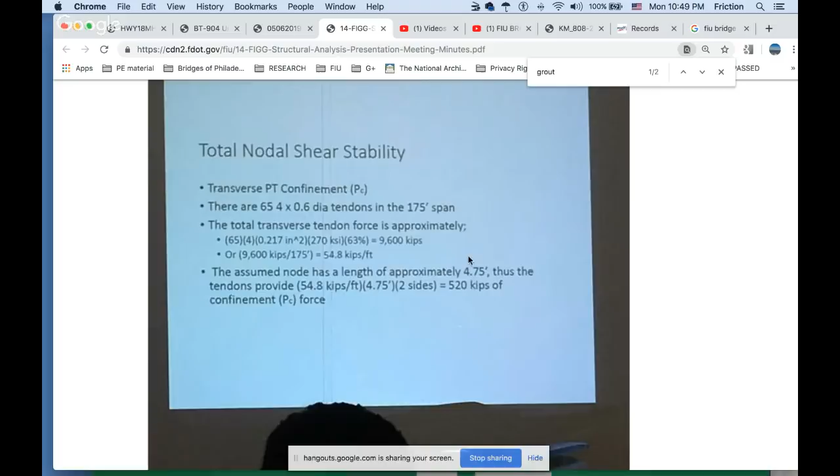transverse tendons. Whoa, that's transverse. I meant longitudinal tendons. This is really nothing to me, because it didn't break in this way. So the assumed node has a length of approximately 4.75 feet. Thus, the tendons provide 54.8 kips a foot. Yeah, I don't see that being the cause of the failure, although I did talk about it folding up a little bit.

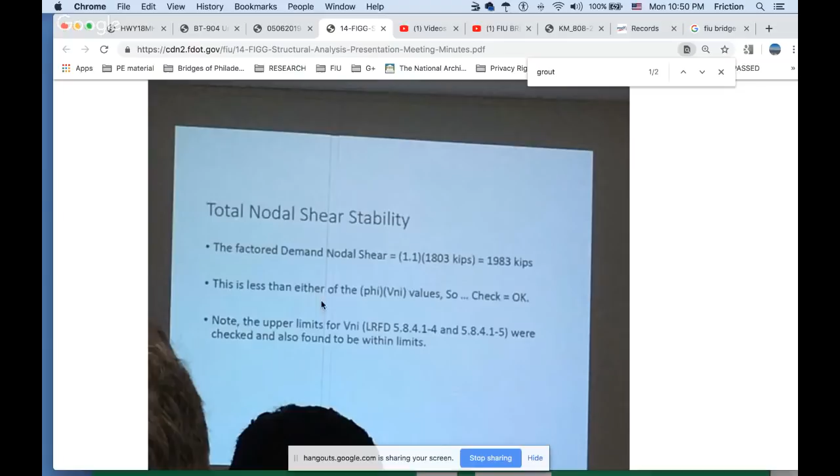Is to neglect the cohesion portion when practical. Thus, without C, whatever, total nodes. Oh, the upper, he says, were checked and also found to be within limits. So this is his presentation. It's an interesting conclusion. Yeah, I thought that was the end of it.

Based on conservative calculations, it is concluded that the design meets LRFD strength requirements for this temporary condition, and therefore there is no safety concern relative to observed cracks and minor spalls. Wow.

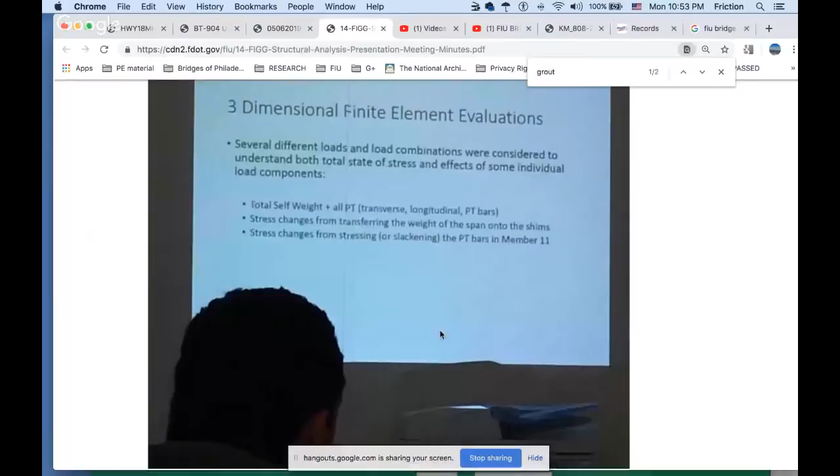So that's their version of it. Number 11 is very important for him to mention. Number 2 is not even mentioned here. All right. Oh, there's a diagram. Cool. I mean, he got that, whatever program he's using, showing the stresses. We need more of this.

And the next statement is, the results indicate that the stress change on the north and south faces is relatively uniform when the load is transferred to the shims. Yeah, that's balanced. That's what I said, except for the weight of the couple diagonals being longer. However it divides down the middle is what I said. Total stress when on the shims. And this is his diagram of it.

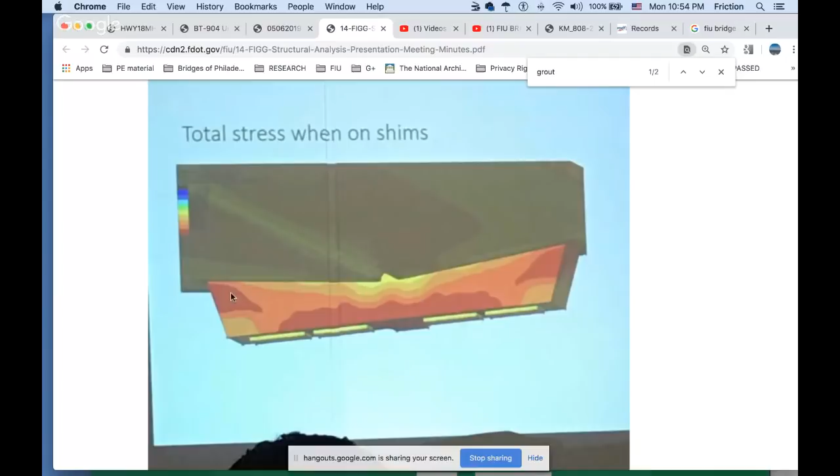His software. And I'm looking for, again, equilibrium. You look for equilibrium here. This looks like the software they ran, that they entered their data in, and this software came back. Looks pretty damn balanced, doesn't it? I mean, this is balanced as can be. So this tells me that, hell, leave it alone. Just grout it and call it a day.

It's kind of odd, though, that these stresses aren't equal out here. That this red, if you will, is not also red down out here. It's lighter on the outside here. The canopy, the overhang, it all comes down. Oh, we don't see the rest of it. It's got an overhang here. The overhang, I would think, would put more force down on the ends. The cantilever. Moving on.

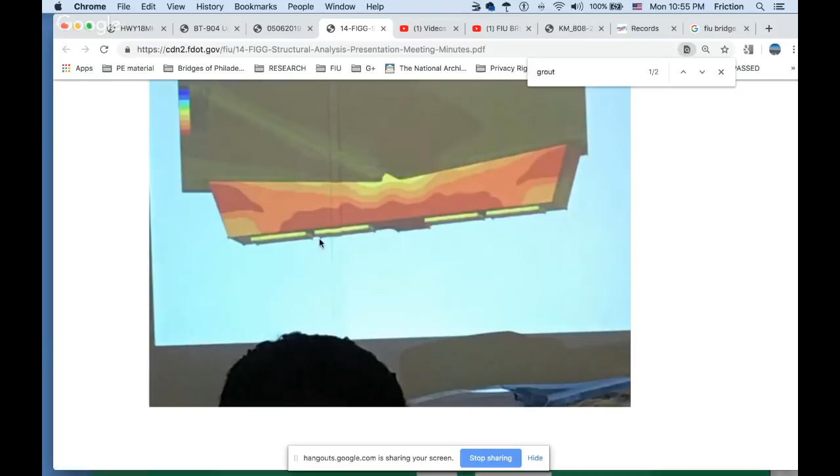Diagonal crack pattern. If it wasn't shimmed here, and it was shimmed here, this would put this as a cantilever at that point. So if this one was in contact, and this one was not, and I know they shimmed along on the pier cap, or top of that pier, pylon they call it, I think, that would make this an overhang and put more stress up here.

So this is theoretical. It's not actual. He's not actually showing the literal load contact points. He's got this as perfect. There's the problem with his drawing. He has these perfectly in contact with the underside of this diaphragm.

Where we see in the video, just saw that they're talking about they need to make it perfect, the grouting. So this is just, academically, just BS. Because it's not showing the real contact points and how its loads will be reflecting. So that's basically just fantasy above. All right, diagonal crack pattern.

Both the hand calculations and the 3D volume element analysis concur that some cracks of the nature photographed are possible. All right, so 3D volume element analysis. Well, that's not true again, because you just talked about these need to be grouted, shimmed properly, etc. And yet now you show a uniform. Your analysis shows no harm, no foul.

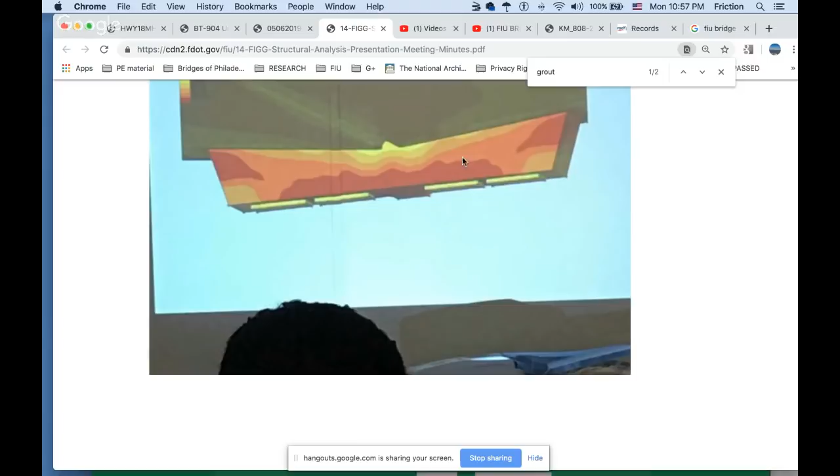This under the load point looks the same as under the non-load point when it comes down to right about where it's transferring the load. This pattern looks equal, balanced. So there we go. Why the cracks did not develop in the casting area is likely related to having a substantial portion of the load carried into central. There we go. I told you he's trying to blame it on the Barnhart. So there we go.

So you're going to blame it on Barnhart. Problem is the FDOT said that you must, you shall... they did not say shall, they did not say must. The manual says that you should consult with the transporting company about the contact points. And how can he say this? This would be him attacking himself, because in his drawings, he talks about where the SPMTs go.

And I know initially we all got trolled on that because they were showing us 2016 plans. But here in the 2017 stamped plans, Denney Pate's plans, the SPMTs are placed, and there's a drawing coming up, are placed pretty much exactly where he says they should be placed.

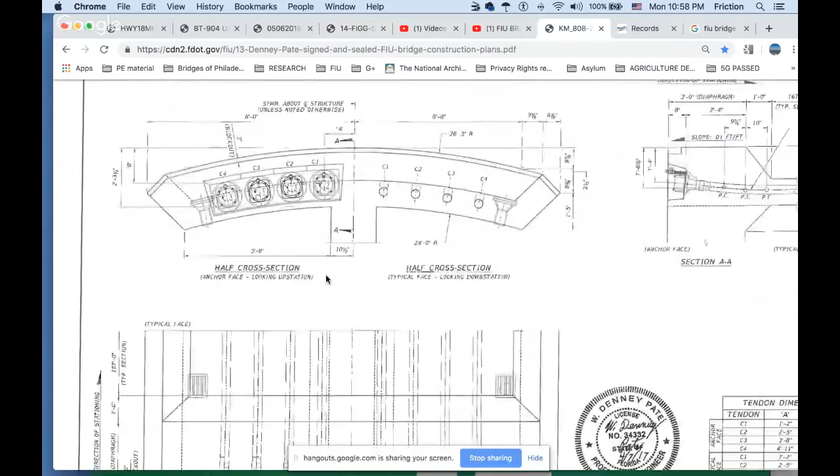Give me a moment, it's going to be bottom left also. Don't ask me why I remember all this crap. It's going to be to the left of the page, I mean. Bear with me. I'm going to look at your comments in just a moment too. SPMTs. I'm just looking for the little transporter. Or did I just pass it? It's going to be on the left side though.

So there are the shims. That's nice. Concrete, 1 1/2 inch minimum thickness. Concrete bearing seat, roughen top of the... Well, it actually looks like that's been changed. Bearing replacement, partial plan bearing replacement. Concrete bearing seat again. They changed it to something else. And there's your shim plate. Shim plates were supposed to be installed. I remember now. Shim plates. Okay, that's what they were crying on about.

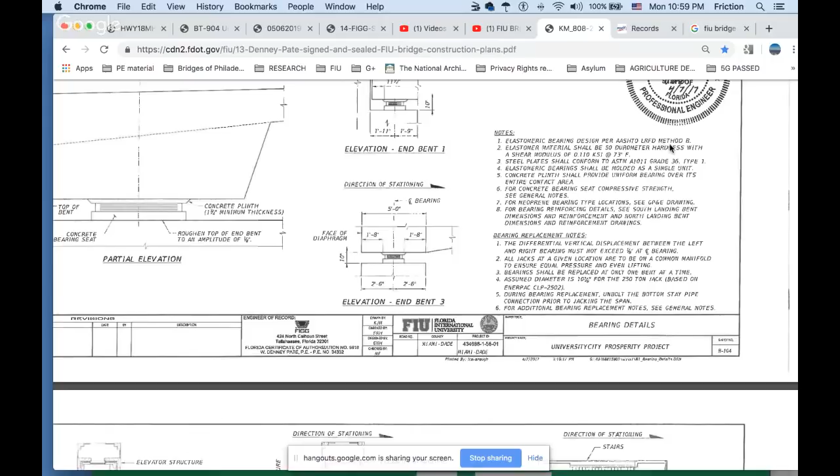And there's your meeting your standards. There's your LRFD also, your standards of what you're going to be following. And there it is: during bearing replacement, unbolt the bottom stay pipe connection prior to the jacking of the span, blah, blah, blah, bearing replacement notes. This is if you had to redo it. And moving on.

SPMT, oh, there we go, right there. Transporters, 2017 stamp, right here. Slide over. There they are, placed where Denney Pate said to place them. These are his drawings, these are his stamps. And now he comes out crying foul when they're placed where they're placed. Why the cracks are not developed in the casting area is likely related to having a substantial portion of the load carried in the central area. Well, it was your drawings, buddy. It was your following.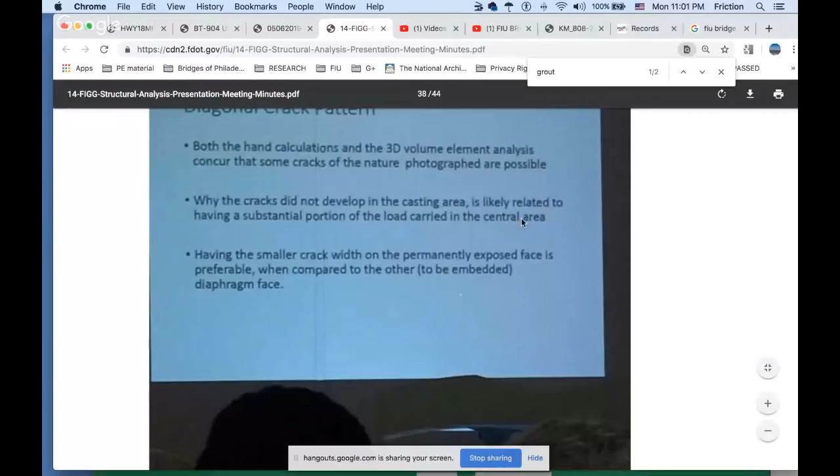Barnhart did their stuff on that. They said that we weren't consulted ahead of time. They were not. I couldn't find anywhere where they were paid ahead of time or anything else. They were not consulted ahead of time. Having the smaller crack width on the permanently exposed face is preferable when compared to the other to-be-embedded diaphragm face. Okay, so no idea how he's trading off what's better.

Oh, awesome. Look, this is over there in the impound. It is unclear how a change in distribution of contact pressure on the bottom surface from being supported like this for several weeks... So Denny Pate, the engineer, bridge builder, is unclear on how things happened here, how things changed. He's unclear. It's unclear to him.

Well, you had a cantilever, and I talked to you guys about cantilevers when you're reinforcing it. This reinforcement is pretty much down the center of this structure, this roughly 1 foot thick pad. And a cantilever, if you're going to support it as they did here, the reinforcement will be at the top of the concrete, and that resists the stresses of it wanting to bend down, not at the bottom part. But neutrally located in the middle, it's not really helping you, except for, say you post-tension these, right? It's working great, as they said.

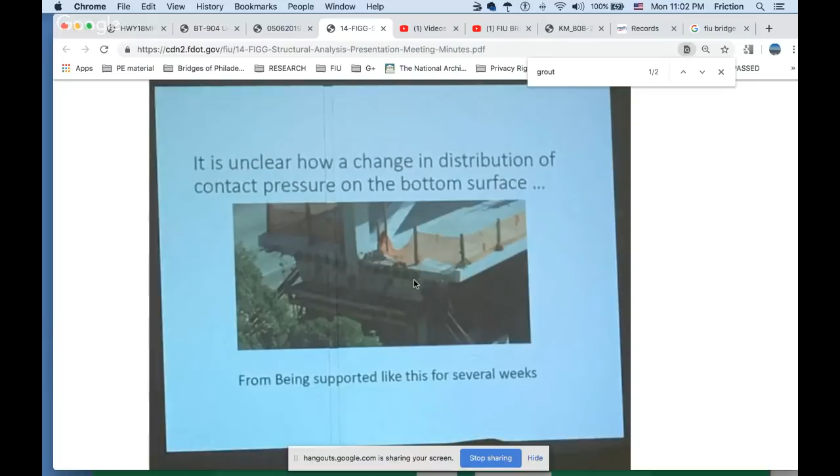Then you put the load here. Then you've got this cantilever that this bridge, these post-tensioning, never experienced before. Now they elongate somewhat. I'm waiting for them to get to that part, that these were elongated. Simple as that. The post-tensioning might have worked, but they elongated. They didn't go back and re-bite at it again, all of them at one time. All 12 of them post-tensioned at one time once they have it over there. That's what I would have recommended on such a crazy adventure.

You're going to be chasing your tail trying to do torque on one if you think of it as torque. Torquing one, then torque the other one. Then check the torque specs on the last one. The clamp force is different on that one. Now go back to the other one.

Your clamp forces are going to be all over the place. You're going to have one doing more work than the other. And then you're no longer going to be elastic. You're going to be past your range of elasticity in the damn cables, perhaps. Oh, whatever.

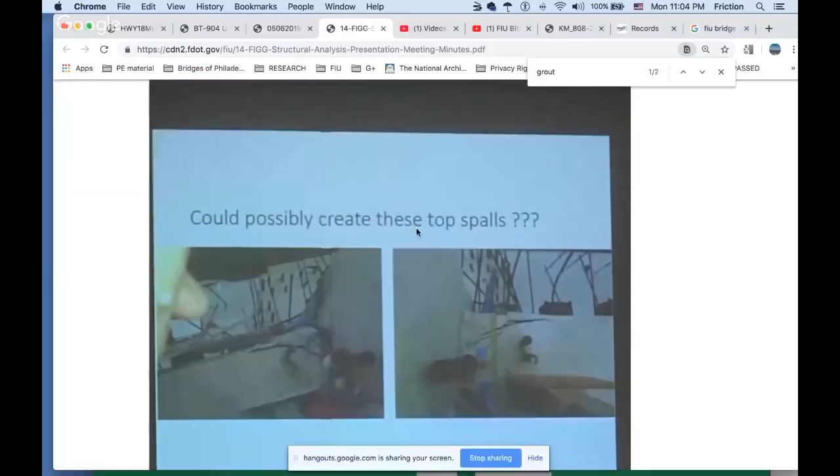To being supported on bottom. So he's just punting everywhere. So we're back to the shims again. Shim plate typical. Well, let's move on. Could possibly create these top spalls. Okay, we got new images.

All right, we saw this image from the idiots and NTSB, but not this far up. They zoomed in on us. And maybe I can find this from the FDOT now, but this is further out. And okay, so this is number 12 going, well, I think, no, we're looking down, but what the hell?

Now we're starting this crap again where I can't get my orientation. I see the outside. Okay, I see these two, but what's this? It's almost like I can see through the bridge, but that doesn't make sense. Through the base. Because there's the pylon out here. This is the pylon it's sitting on.

There's that burn marks I was talking about. There's the cracks now. But there were cracks here. So this looks like a different crack, doesn't it? Okay, could possibly create these top spalls. It's just by itself. He just did a presentation, one screenshot, could possibly create these top spalls. So he's not sure. So what are you saying is creating these top spalls?

Going back to this. So he clicks through the presentation. So we run across this first. He goes, click on the presentation, and I'm talking to you. It is unclear how a change in distribution of contact pressure on the bottom surface from being supported like this for several weeks, and then click the next slide, I'm guessing, to being supported on the bottom of the 4 shims, click next screen, to a question, could possibly create these top spalls.

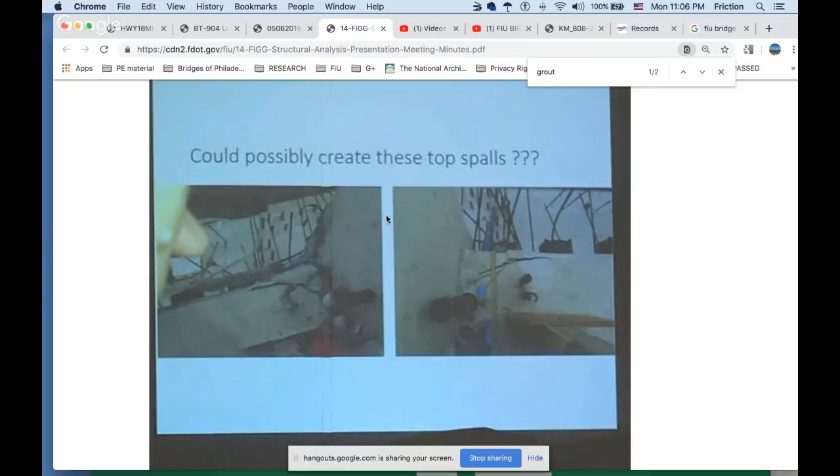So it's unclear how those could have created this. Well, don't try to tie it in. Maybe you got failure another way. So he did the post hoc thing. He decided that that was related to this crack, but it's unclear how. So he had data. He made a conclusive file, with the question mark on his conclusive file, but he can't make the data match his conclusive file. Moving on.

The total plotted as principal tension stresses from the 3D model. Well, again, I'm looking for equilibrium first thing, right? And it's a model. Now, you know, guys, I hate models. I like common sense, old school. I'm much older than you guys think I am.

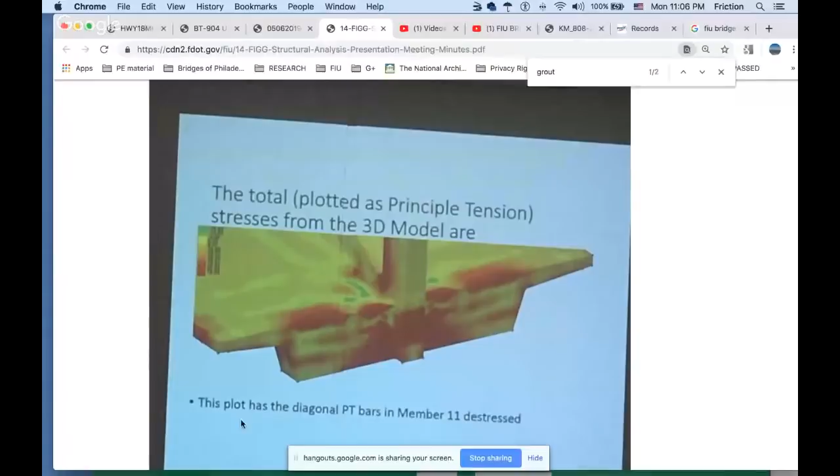This plot has diagonal post-tension bars in member 11 destressed. Okay, so he's saying that number 11 is, this plot has diagonal post-tension bars de-stressed. Okay, so de-stressed, and it's showing that 11 is acting like the deck. Status quo, nothing. And that's that 950 kips coming down here.

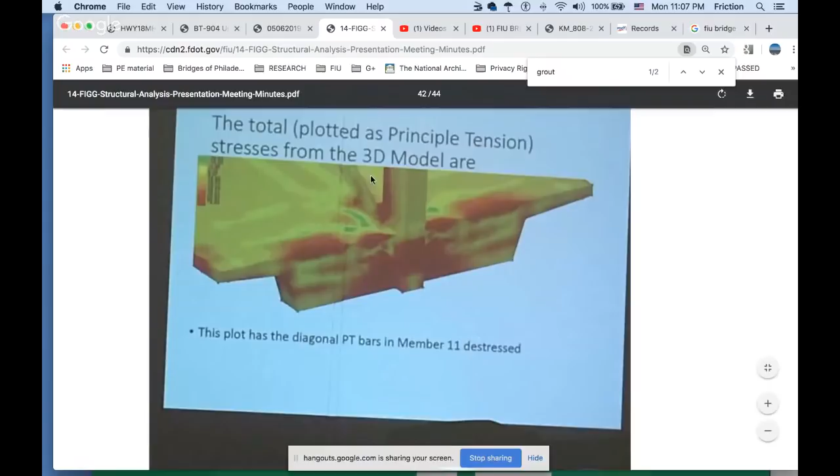The hell of a lot of weight he's got coming down that thing. How the hell did he get that 950 kips down there? It's like half the damn bridge coming down here. How did he get that? The canopy's not that big. So some of that load must be working its way back into the canopy and down number 12. But didn't even look impressive.

Moving on. And the change in principal stresses solely from de-stressing the post-tension bars in member number 11. And so this is 11, I'm guessing. Trying to get my orientation. This is 11. Yeah, that's a tough one, isn't it? The way you configure this. But it looks diagonal-ish, box shape and the cut.

But he said this is from their design. They don't have their 8-inch concrete in there. Nothing is showing having issues. But yet we know there's cracks in this thing. So this whole computer model dropped the ball. It's not showing cracks. The analysis neither total stress nor post-tension bar only stresses shows any spike in tensile stresses at the corner of the deck.

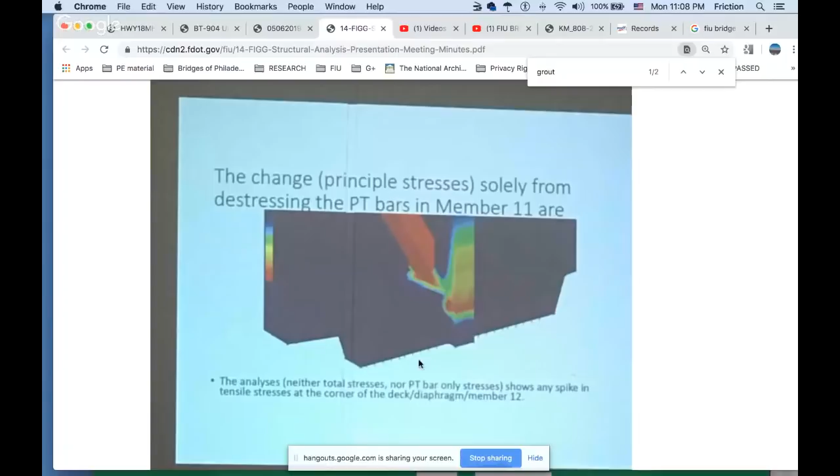So it does not show any spike in tension right here of number 11 and 12 at the deck. He's talking about tension, what I've always talked about. I said it's in tension. He says it doesn't show it, but yet clearly it's identified itself.

So conclusion and recommendations. The diagonal type cracks in excess of FDOT criteria, okay, meaning FDOT won't allow those excessive cracks, should be sealed with approved methods and materials. Epoxy injection. I think I joked around about epoxy injection with this, you guys. Can't believe it. I said, of course you wouldn't do epoxy with that. Apparently, that was where they were going with that.

And where you go beyond injection, that'd be like epoxy pouring. And then epoxy is going to be in tension. And what? Bond to the post-tension bar, or possibly bond to the post-tension bar. And then you're going to de-stress it, but the epoxy is going to act different in expansion and contraction than the concrete. So this is just a weird thing here.

Because this epoxy is going to be friggin' 60,000 PSI. So now you defeated the purpose of FDOT's rule saying your grout and your concrete will all be of one consistent PSI. So by doing epoxy, you now created a conflict. You created a shim that will start doing cracking. That's what I project.

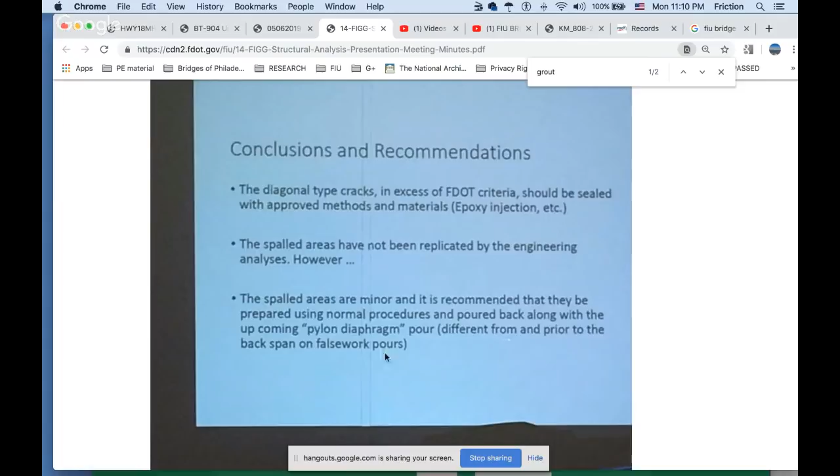However, the spalled areas are minor, and it is recommended that they be prepared using normal procedures and poured back along with the upcoming pylon diaphragm pour, different from and prior to the backspan on falsework pour. So get to working on the repair Saturday. That's 44. They hit 44 on that.

All right, let me see your comments and then let's see what we got here. So Doss, why did FDOT decide to release the presentation today? Well, obviously what's going to come forward now? That NTSB is done and FDOT is like, hey, if you're done, no harm, no foul. We can't get any more data from you. We can't get any more protection from you.

So we're releasing ours. Because remember this, that when you participate with NTSB's program, if you don't like what they say, you can actually dispute with them their findings and maybe get your point across where they'll adjust their findings. So either NTSB is going to mimic the FDOT report, or this is FDOT fighting what they already perceive as NTSB's release.

Remember, if NTSB kicks FDOT out, FDOT will not be able to see the findings before they release. But if they're still part of NTSB's program of the secrecy agreement, then they will, not may, they will receive a copy before the release and have that opportunity. So my thinking is that the NTSB is giving this permission to FDOT, or FDOT has already done a counter to NTSB's conclusion, and now they're trying to get their own stuff out front first.

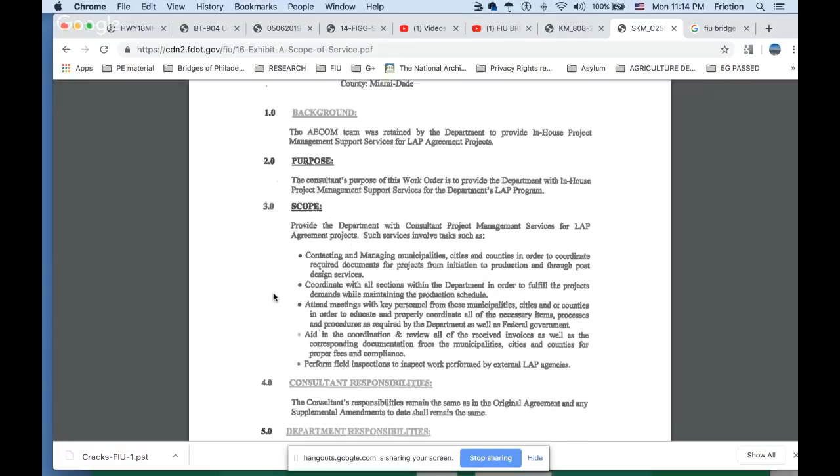This is that FDOT's thing. If I remember, I did this in a video, and the acronym wasn't the federal government's acronym. It was that one. Look, I forget which one, but that's all. It's just an acronym for that. Oh, great! Can't open that one.

And this was them, I think, showing they were monitoring the internet for anything with the word cracks in it. When you saw that, let me go backwards. So it turns out it was FDOT monitoring. It says any documents with the words crack or cracking.

Well, it says documents, but FIU was monitoring too, as you guys remember that. And there's the pylon meeting. It was actually, there's your certification right there, LAP. So the

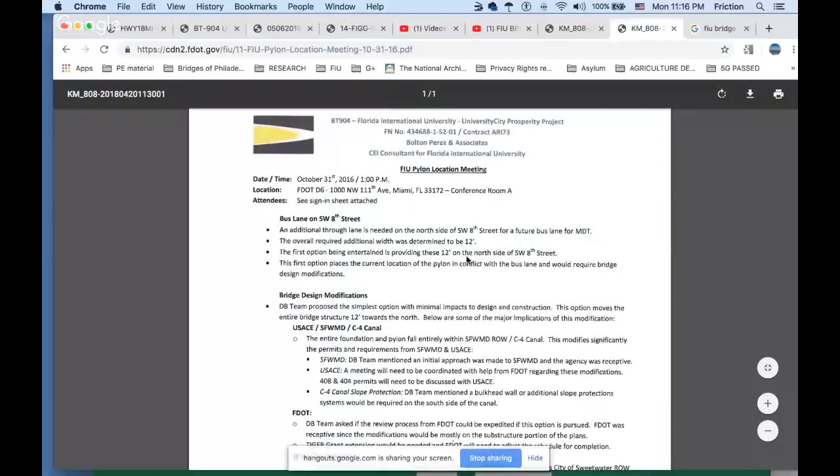I think I'm going to trash this with you guys. I'll copy that, and I'm going to dump this over here. And you guys now have access to that. Your lovely access. Enjoy. And what else we got?